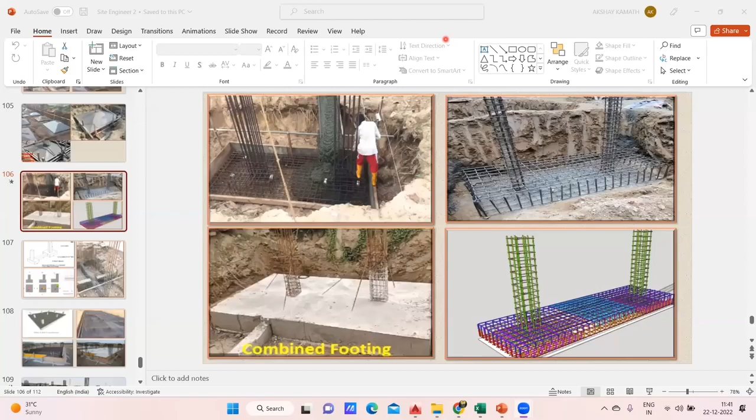So in this lecture, we'll try to see how to take out the quantities for the combined footing. Okay, that is a BBS for a combined footing. Now, one thing you need to understand: in the isolated footing, we used to have a bottom mesh. That is, this is bottom mesh on the longer span and we have one on the shorter span. This was the isolated footing, isn't it?

But in case of combined footing, what will happen? Same thing. You will have a bar in the longer span. You'll have a bar in the shorter span also, but this is in the bottom reinforcement. In the same way, on the top also you'll be having a bar in the longer direction and you'll have a bar in the shorter direction. So that's the only change you'll get in the combined footing, which you can appreciate here also.

If I try to drag this particular image, just observe here what has happened. You can see the bar is in the bottom also, longer span and shorter span. And similarly, on the top also we are providing reinforcement. Very simple. So for this, I'll teach you how the BBS has to be done. Already I have prepared and kept it. First, I'll explain to you, then we can try to prepare the same Excel sheet.

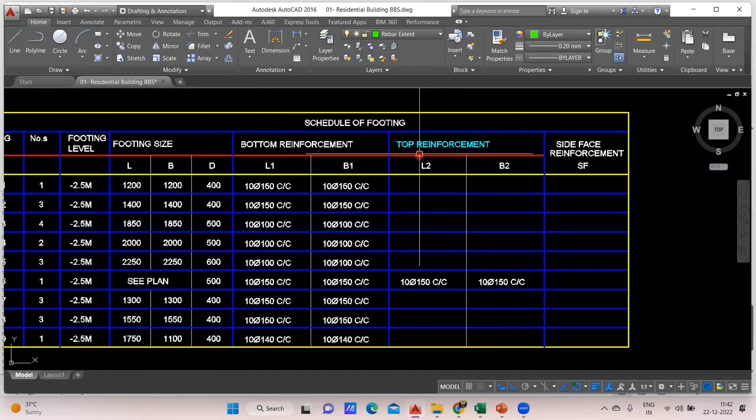So in our drawing, we had a footing, that is F6, which was a see plan they had written. See plan means it's a combined footing. They did not mention it here. And also remember, whenever you check the drawing, no one will mention to you isolated footing, combined footing and all. The moment you see any footing has a top reinforcement, most of the time it will be your combined footing. Like this is bottom reinforcement, whereas only for this footing, that is F6 footing, they have given the top reinforcement. So usually the meaning is that it is a combined footing.

Now another case is that it's not that all the time whenever you have a top reinforcement, it will be a combined footing. No, that is not the case. There is every chance even an isolated footing will have a bottom and a top reinforcement. So remember my words, there's every chance you have an isolated footing, but you will get the reinforcement in the bottom and also on the top. Usually this happens in case of industrial structures, where I had given you the assignment for the plinth beam. Those are industrial structures.

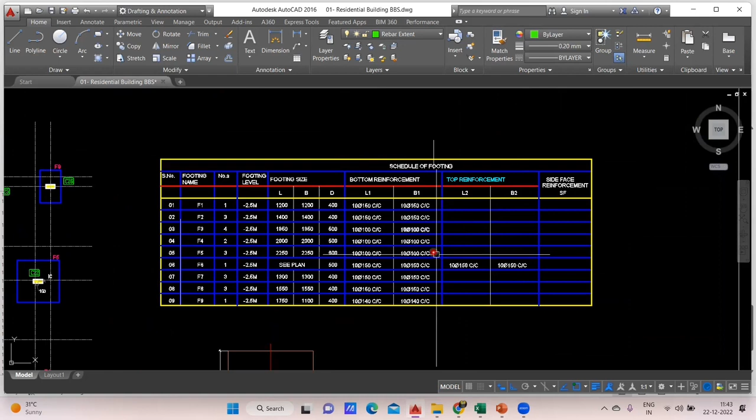There, even though it is an isolated footing, you get the reinforcement in the bottom and also in the top. The reason is that the load coming on the footing is more, and it is subjected to wind pressure and all. Because of that, we try to provide top reinforcement also. But don't be under the impression that wherever the top reinforcement comes, only that is combined footing. No, that is not the case. Okay, fine, this much is understood.

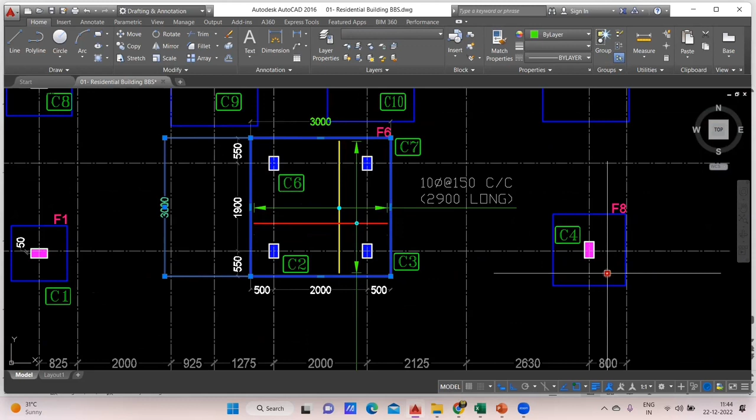Now we'll go forward. So in this, we have written F6 footing, and just see the size of the footing. I see the size is not given here. In that case, you have to come to the AutoCAD. This is my F6 footing, and I've taken a dimension. Outer to outer it is 3000 mm, and from here to here also it is 3000. That means the size is 3000 by 3000. So that is the same thing I've written: size is 3000 by 3000.

Coming to the depth of the footing. The depth won't be shown here. You have to come here in the C plan. What is the depth? F6 footing, it is 500. So I'll input 500 here. I've written 500. Where is that? I think I didn't upload. So this should be 500. Write 500. Done.

Great. So the same thing I've done here. Length is 3000, breadth is 3000, and depth is 500. So first we'll start with the bottom bar. Here I didn't write bottom bar, top bar, because it is understood it is an isolated footing. Only the bottom reinforcement will come. But here I'm writing, first I'll do the bottom bar, then I'll go with the top bar.

And you see the shape of the top bar, it is something like this. Bottom bar, it is like this. Okay, I'll teach you all these things, how it has to be done. Now coming to the bottom bar, again, same shape you have to draw. Nothing is changed. The method remains the same. You'll write here F6 bar along the shorter span, F6 bar along the longer span.

How many footings are there? This combined footing of F6, how many are there? So if you go back to the drawing, it is written only one. So only one number. Even in the plan, you can see this is only one number here. Only one footing we have. So I've written one here. Now come to the diameter of the bar. This also you need to input. Go back to the drawing. Come to the F6 footing. Observe this part, what it says.

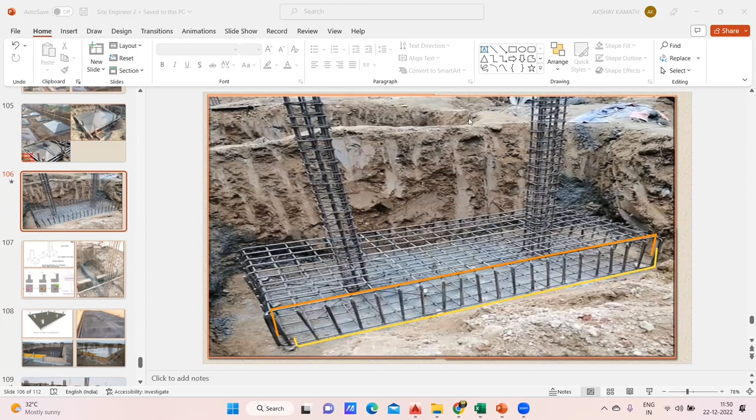In the bottom, when I'm giving a shape, my shape will be like this. This will go to the top. And when I'm giving it at the top, my shape will be this way. Right? Agree with me? Practically you can see the same thing also. That is the only change you're supposed to do. So that is why in the Excel sheet I've written top bar now. How do you do this? Again, you know how to do this.

It's pretty simple. What I've done is I just copied the same thing from here. I did Control C and I pasted it here, and told it is F6 footing, and made all those changes. Then I inserted 2 rows here. Keep your mouse here and press Control and plus. The moment you do Control and plus, two rows will be inserted, and you can merge it this way. Select, say merge and center.

Now you write here bottom reinforcement. See, all these things you should do. Bottom reinforcement. Done. If you want to change the color to differentiate, I'll give a blue color. So bottom reinforcement is done.

Now for the top reinforcement, what do you do? You just select this, in this way. Come here, give a white color. Now this much area you can utilize. Now again, you can make use of this border option. Draw border. Now you draw the border like this. See, one.

Come here. Draw border. 2 and 3. So this is the top reinforcement shorter span, and then leave 2, 3 spaces and come here. This is your other one. Done. You got the shape. Else you can make use of the insert button, illustrations, shapes, the normal method I taught, and that also you can do. It's totally up to you. Instead of the shape method, follow this border method. It's easy actually. Done.

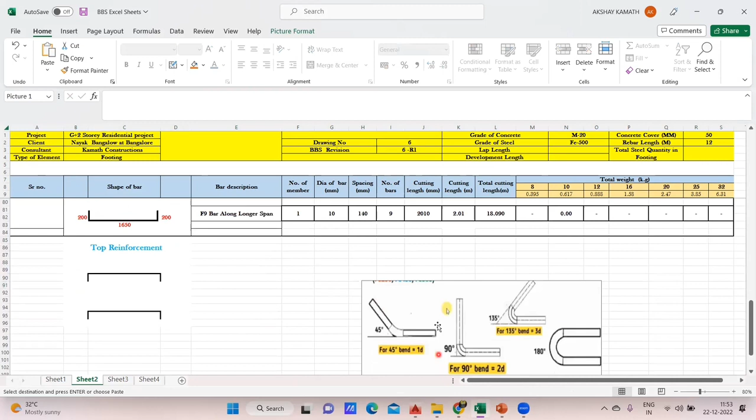Done. Next, you're supposed to just copy whatever you have written from here. Say Control C and bring it somewhere here, to the center. Else you can do one more thing. You can arrange this properly. Just merge these two cells, so these two will be one, so that this will come in the same line. You're getting my point? Because it should look good. That is why I'm doing all these things. Otherwise, it's not actually required.

Because if tomorrow somebody asks you for the Excel sheet, it should be in a readable format. Even he should find it good while reading. Done. So these ones are done. You can erase. If an extra comes, you say no border, it will go. And then you select and then say thick border. Okay, done. This is also not required. Come here, or even you can say erase border, and now you can erase it in this way. Okay, erase.

Now what you do? Now you copy this. Say Control C, bring it here and say Control V. Okay, it cannot be done. No problem. Then you write it. Then you say Control C, paste it here, Control V. Okay, and now you increase all these things. It will take some time. If you can copy, you can copy. Sometimes that will not happen, not an issue.

So what is the footing name? It is actually F6 footing, not F9. Okay, so write F6, write F6 footing. Okay, this also F6. Okay, done. Now come to the number of members. It is 1, no? I'll input 1 here. So first let me do that. Select, take it to the top, middle, increase the font of that, and then do this also, so that you don't have to change every time.

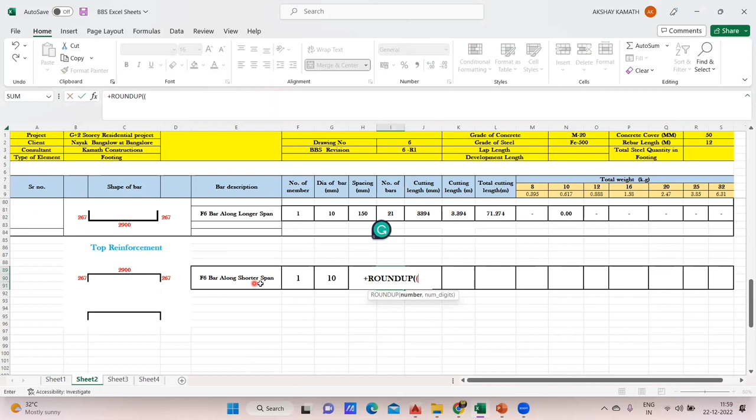Now number of bar. How do you find the number of bar? So for number of bar, again, we have to do round up. Okay. Open the bracket. Then 2 times you have to open the bracket. So we are finding along the shorter span. If you're finding along the shorter span, I need to take the longer span. So longer span is 3000 minus 50 on the left side, minus 50 on the right side. Close the bracket, divide by spacing. What is the spacing? 150.

Now it's not visible. I'll directly write 150. Okay. So this 150 when you write, again you have to write this. You have to open the bracket. Okay. And close the bracket. Finish. Then you write plus 1, comma 0, bracket close 2 times and enter. Okay, again that error is coming. The error is again for the very same reason. 3 open brackets and this close bracket is not matching. Put, yeah, now it should.

Because why this error came? No, I gave 2 open brackets this time. So what happened? 1, 2 and 3 open brackets are there, but closing bracket you see 1, 2, 4 brackets. So again it didn't match. That is why I got this error. So in that case, what you do? You deduct one thing. Okay. That's it. Now it will be all right. See, 21 number of bar I got. Here also I got 21. Correct, no? Fine.

Now find the cutting length. So cutting length, you know, plus what you do? 2900 plus exactly 267 plus 267. Then what you do? Minus, open the bracket, 4 into D. 4 multiply by D. D is how much? 10 diameter bar. Close the bracket. How much you're getting? 3394, 3394. Again, this answer is cutting length in meter. So what you do? This answer you divide it by 1000. So you can put bracket and you can do that also. It will be correct. Okay.

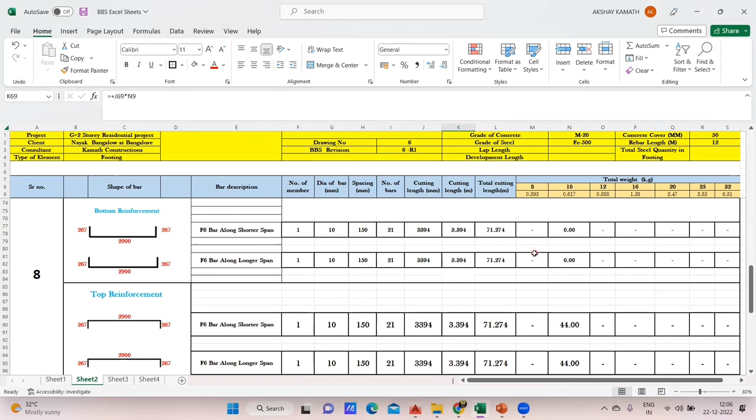Okay, so try to prepare the Excel sheet. It's very simple preparing the Excel sheet. And once you interlink, just try to verify your answers. Because why I'm telling is in this drawing it was easy for our calculation because everywhere it is 10 at 150.

Now in some other drawing, you may get where your bottom reinforcement is 10 at 150, 10 at 150, and top is, let us say, 10 at 200. So in that case, we write 200 here, 200 here. Accordingly, your answer should change. So did it change? It didn't change, because we had not interlinked. So in that case, this 150 will become 200, and this will also become 200.

Okay, I'll tell you how it has to be interlinked. I'll interlink because last time I didn't get the chance because it was not showing. Now we'll interlink this. Okay, see. Yeah, correct. And now here also I'll interlink. Okay, so when I interlink, this will change automatically. See, your answer also got changed.

Now let us say instead of 200, your spacing was 250. Now you see everything will change. 13, this also is 250. Finish, got it? So that is why you have to interlink.

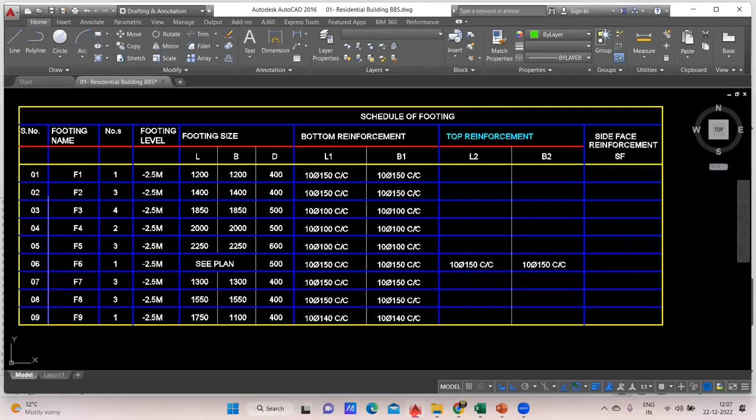Now let us say in AutoCAD, instead of 10 diameter, it is 12 diameter. I'll change everything here. Let us say you are working on a project where you got this as 12. Instead of 10, it is 12. And this spacing, I'll go with 225. And here also it is 12 only.

Usually these changes will not happen. The structural consultant will not make so many changes. But still for our calculation I'm doing it. And I'll say this we are going to place at 250. Usually that doesn't happen. As far as possible, the structural consultant will try to give 150, 150. Top also will keep 150 only.

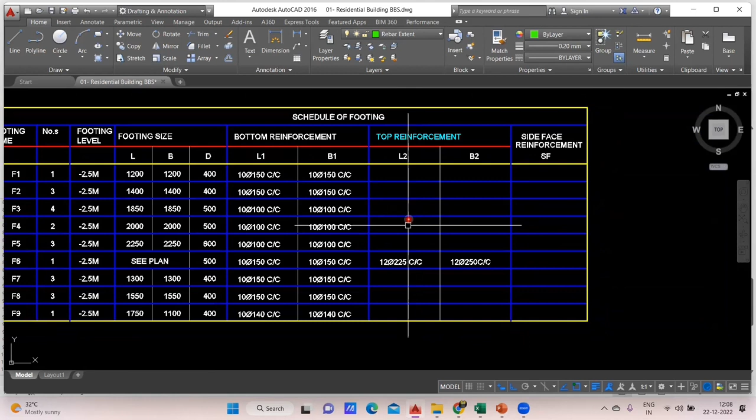Even though 225 is a requirement, we go with the same so that from the execution point of view it will not be a problem. That is why in most structural drawings it will remain same, but in few places due to some condition we change. Okay, so L2 is longer and B2 is shorter span. Shorter it is 250, longer it is 225. So shorter you make it as 225, and longer it is how much?

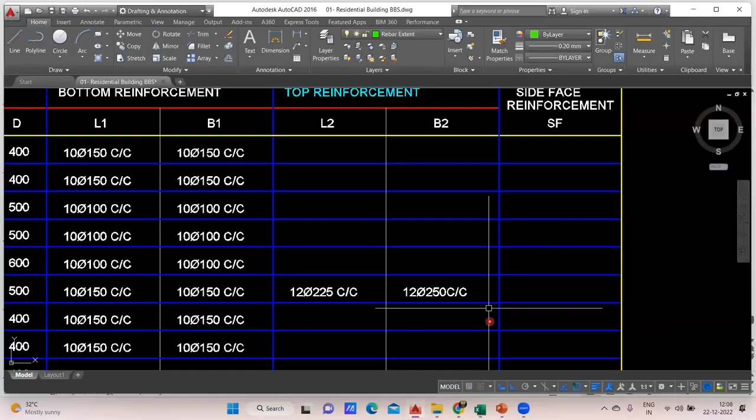Okay, shorter it is 250, no, B2 it is 250, and this is 225. Okay, how did I identify? I've written shorter here, so this is shorter. B2 means shorter span, and L2 is longer span, 225. So for longer I've written 225.

And diameter, what I've done, both are 12, 12. So what we'll do, here also 12, and here also 12. Done. Now you see everything got changed, isn't it? That is why you have to interlink in the Excel sheet. Everything will change. Simple. So if you get a problem something like this, it will change.

In the same way, I'll change the dimensions also. I'll not change it now, I'll show here only. Instead of this 3000 by 3000, let us say you have a footing which is 4500, and this is 2500. So automatically everything will change here. You see, everything got changed, isn't it? That is why you have to interlink everything so that it is easy for you to do the calculation.

Great. So I hope you have enjoyed my lecture up to here, and I've explained everything regarding the combined footing, how the BBS has to be done. I've given you different case studies also, how it should be done.

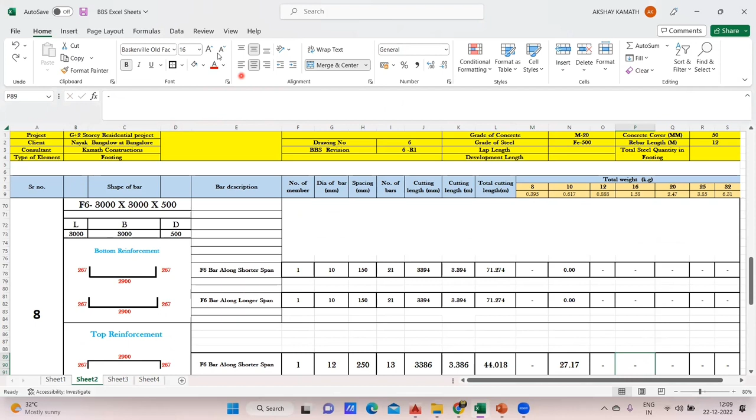So I hope up to here you have finished your Excel sheets and understood everything. The combined footing is covered, the isolated footing is covered, and for this entire drawing, all the BBS we have done. Once that is done, the final thing we are supposed to do is the total quantity required. For each footing we found that this much steel is required, 10.90, 11.16. But when you give the final details, it should be something like this.

At a single glance, you should come to a conclusion like how much 8 mm bar is required, how much 10 mm is required, 12, 16, 20, 25, and 32. And out of that, what is the total steel required? So for that, I've prepared a kind of row here. In this way we can identify. I'll teach you how it has to be done. It's very simple.

Since we did up to there, I'll do it here. Just select up to this much and say merge and center. Then in this part you have to write all these things. Whatever you have written, copy the same thing, like 8, 10, 12, 16, 20, 25, 32, Control C, and paste it here. It should come in the same line.

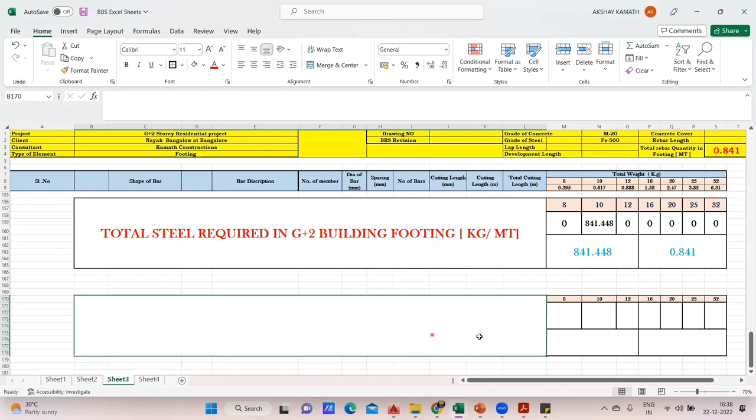Now select this entire thing and keep it in this way. If you want, increase the size. Great. Now we'll write total steel required for which one? It's a G+2 building, or you can write residential building, footing. When you write the final thing, it should always be in metric ton, but I'm writing both kg and metric ton. MT is metric ton.

So this is how it is. Once it is written, bring it to the center, and then increase the size. If you want to change the color, change the color. And write total steel. Fine.

Total steel. Got it? Done. Now 8, 10, 12, you just have to come and check here. In this particular footing, luckily all the diameters we used are 10 and 10, 10 and 10. Everywhere it is 10, right? So everywhere it is a 10 diameter bar we used. That means the weight also has come in the 10 diameter column.

All right. So you come here. 8 you can make it 0. 12 also it is 0. Since there is no steel in that, everything you make 0 except the 10 diameter. Now for the 10 diameter, we'll type plus sum, open the bracket, and then go on selecting from here. This is 10, no? So drag it this way so that all the values under the 10 diameter bar are selected, up to here. Then close the bracket and hit the enter button.

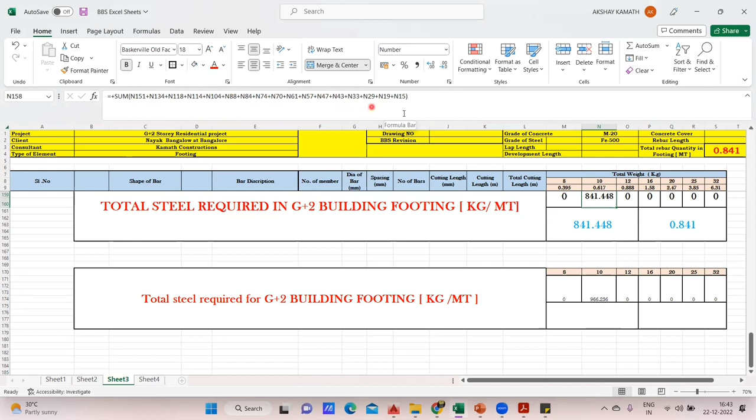And here it is coming 841. So we'll count: 1 to 17 here. And here 1 to 20. This is correct. And here it's 1 to 17. That means 3 are missing here, right? No problem, we'll verify that. Because, again, I told you, whenever you miss anything, you should know how to verify it.

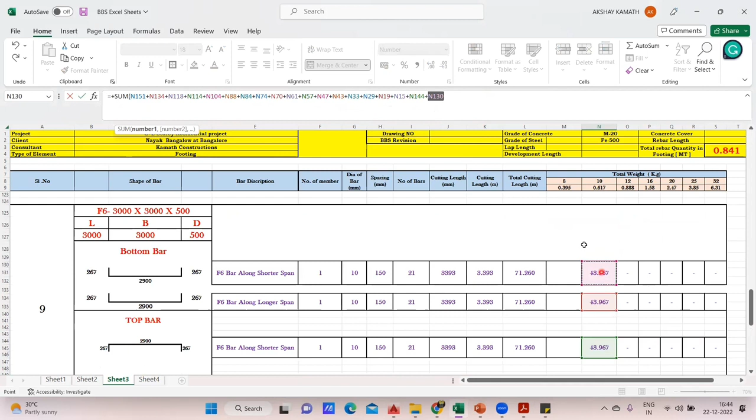I think this is missing. We have not considered this particular one. N144, you see, N144 is missing. Plus, again, go to the top. See, even this is missing, N130. So 2 we added, and I think one more is missing. See, this is also missing. Now it is okay. Close the bracket. N100 was not added. Now hit the enter button. See, now it's correct, 966.236. We were successful in identifying the error. This is how we are supposed to identify the error. Great, done.

Other than that, for 12, 16, 20 no steel is coming. In case it was a 12 diameter bar, we would have written it under the 12 diameter bar. I'll show you that later. Once that is done, next you have to add it. Here we'll write everything in kg. That is this plus this plus this plus this plus this plus this.

Okay, so again, it is 966 only. So this is the total steel that is required everywhere, including all the steel. Here it is showing only 10 diameter steel, how much it is required. Here it is showing the entire steel that is required. And here what we'll do, this answer we'll divide by 1000 so that your answer will come in metric ton. So 0.966. So this is the actual steel that is required in metric ton.

Usually when you order the steel, you order in metric ton. You don't order in kg. Okay. So you should say this much metric ton of steel is required. So that is why I've written metric ton. MT is metric ton. Normally speaking, when I say metric ton, you don't understand the quantity. But when I say in kg, you get an idea. Okay, 966 kg. Okay, done.

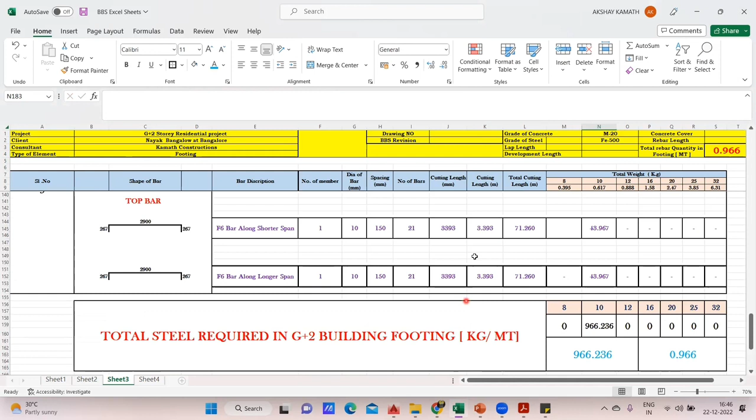Now let us consider, I'm giving some random values. I'm getting a 12 diameter bar. Let us say, okay, this is the final answer. You also should get the final answer, something like this. Even if it is very close to 950 also, it's okay, doesn't matter. So try to do your Excel sheets and you should get 966.236. Even if you get 975, even if you get 960 also, it's okay. You don't have to get exactly the same. If your values lie in between 950 to 1000 also, it's okay, not an issue. You don't have to worry. Maybe somewhere you might have made a mistake and it's totally okay. Because again, we add 5% wastage to this.

Okay, chalo. Now let us consider in this footing, somewhere we had a 12 diameter bar where 230 kg steel had come, and 8 and 20 diameter we had got some 450 kg steel. Finish. See, automatically the Excel got updated, isn't it? So 966 plus 230 plus 450 will give me 1646, and 1646 divided by 1000 is 1.646 ton, and automatically you see 1.646 has come here. So that is how the interlinking should be done, so that you can do everything in a better way. Okay, fine. Okay, that's it. Now again, this is the final thing what we have got.

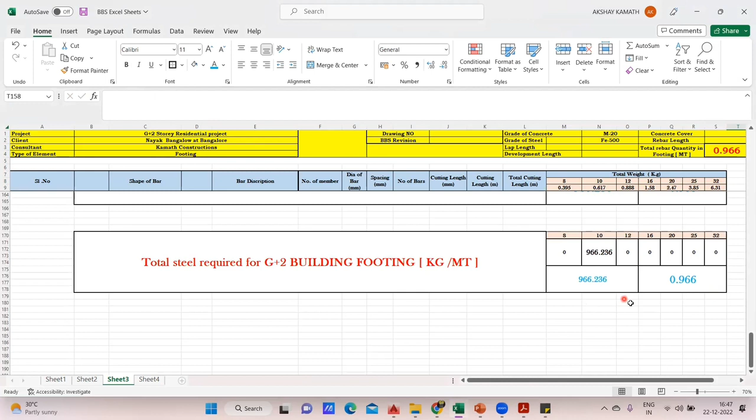Usually when we do this estimation sheet in this way, we usually add a 5% wastage to this. Even though you're getting 966, you can add 5% wastage to that. Either you can make a separate row here and say 5% wastage, or here itself you can add it. If you want, I'll do it here only. I'll add one more, and this is for the wastage. So when I say wastage, you say 5%, so 1.05. Why 1.05? Because 5% is 1.05. If I multiply by this, this is my wastage.

Including the wastage, this much steel you need to order, because whenever you order the steel, it's not that the same quantity will go in the execution. 5% may go in wastage. That is why we try to prepare the reconciliation sheets later. Anyhow, so this is one way of doing. If you don't want to do it that way, write 0.05 multiply by this plus. Okay, you follow this, 1.05, and 0.05 is 5%.

If you don't want to do it in that way, there is one more method. That's simple. You write this 966 plus open bracket 0.05 multiply by this value again and close the bracket. Same answer you should get. See, 1014 only you got. You can follow both. This is easy. 1.05 into this answer will give you 5%. This value is after the 5% of wastage. That's a common practice. We add 5% wastage to the steel what we have got.

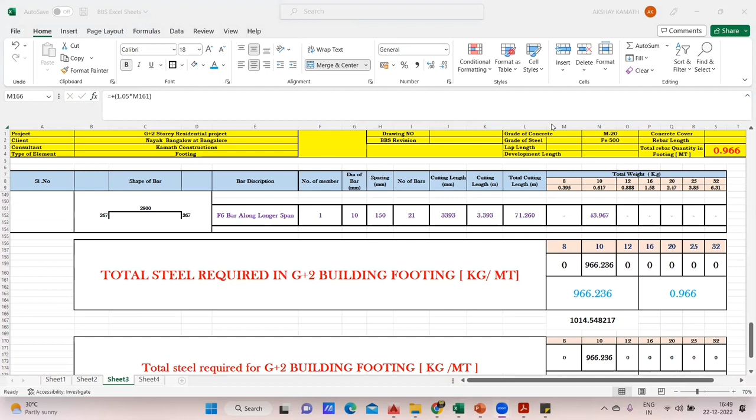So in this lecture, let me clear a few of your doubts. Whatever I taught you so far in the footing BBS, you may have a few doubts, like when we should consider the bend deduction and when we should not consider the bend deduction. Then in a few of the cases, I told you that for the depth you have to take 2/3 of the depth, right? Here, if you remember, we have taken 2/3. In some of the cases, I told you if it is not required, not to take it. Now, when do you use such cases? I'll give you complete information here.

See, whatever I told you right now, everything depends on the type of project that you're working on. That's the first thing. Second thing, it depends on the client and, let us say, the contractor. So again, it depends on which company you are working for and what they follow. These are the three things it depends on.

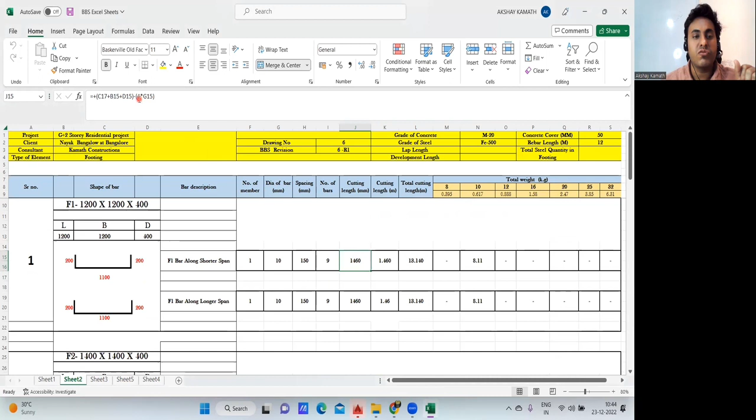If that is the case, come to the Excel sheet. Bend deduction, anyhow, I applied it. Here you can see the bend deduction minus 4 times I have applied it. This depth, they are telling you to take the complete depth. That means instead of multiplying by 2/3 the overall depth minus top cover minus bottom cover, which is a general construction practice, you take the complete height minus the top cover minus the bottom cover. Then you just remove this 2/3 from there. Automatically your answer will be 300, 300, and this also has changed.

In the Excel sheet, initially the weight of the steel was 8.11 and the cutting length was 13.14. The moment I remove that, it came to 9.22 and 14.940. This is case number 1. If your company is following this, or if your manager has told you this is what we follow in the company, then you follow this. No harm in that.

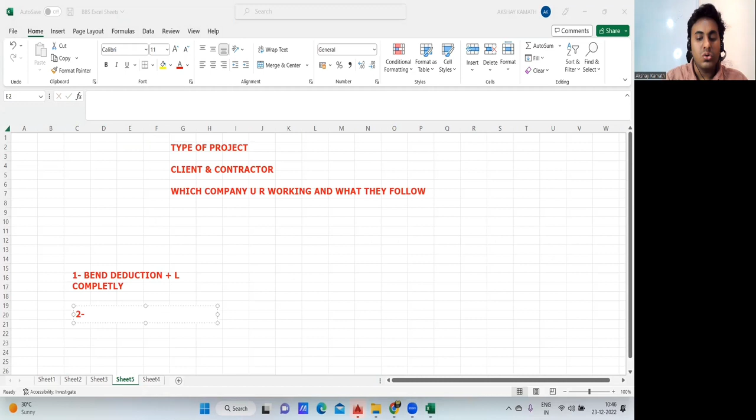Now we'll go to case number 2. Let us say in your company they told you no need of bend deduction. You don't have to apply the bend deduction, and whatever L you're taking, you can take 2/3 of the L. 2/3 means 67%. I'll write it as 2/3 L. This is another company where you are working, or that particular company is following this method for the bar bending schedule. No problem, you follow the same thing.

What are we supposed to do? We are supposed to not apply the bend deduction, and we can take the depth up to 2/3. So in that case, simple, wherever you have applied the bend deduction, that is -4 into, you delete this part. Bend deduction is not required. So criteria number 1 is satisfied. Second, you apply 2/3 of the depth.

So 2/3. Okay, 2/3 if you do, it will be 200. Accordingly, you see your cutting length will be this time 13.5 and 8.33, 8.33. Previously it was something 9, so hardly there is any difference now. So we have taken two cases. One case where the bend deduction has to be applied, and also you don't have to take complete 2/3. Here, no bend deduction, but you have to take 2/3.

In this way, there may be another company which says that, like we did previously, you don't have to apply bend deduction, and you don't have to take that complete 2/3 depth. Accordingly, you can work out, based on what the companies follow. I have seen people taking it, but in most construction practice, what they do is apply 2/3, because of this L. For example, let us say this is my footing. I'll explain you here.

Let us say this is my footing, and whatever L you are putting, this will come in this way. I'll go with only bottom reinforcement, no need of top. This is bottom. Only up to this much length it is enough, because that itself is your development length. If this is your column, your development length starts from the outer face of the column. From here your development length starts. That is the concept we apply.

Now let us say the depth of the footing is 600 mm. So if I want to find this L, what would be the formula? The usual formula we apply: overall depth minus 50 mm cover from the top, and minus 50 mm from the bottom. So it will be 500 mm. That means this particular L will be 500.

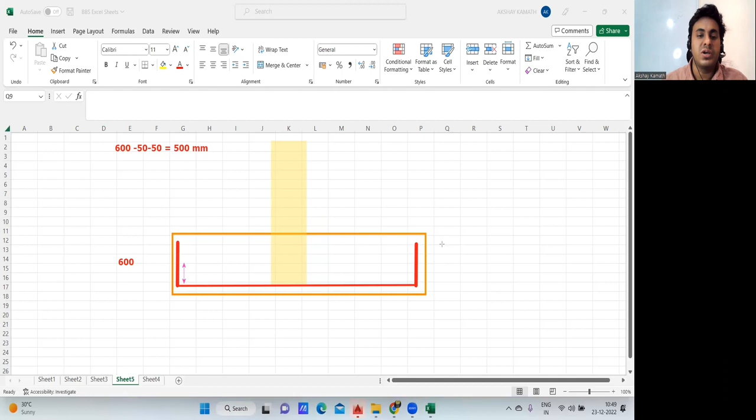So 500 means roughly it will come up to somewhere here. Practically it's not required. If the depth is 600, 500 will come somewhere here. Practically that much length is not required, because actually it's a wastage of steel also. That is why a few clients say you take 2/3 of the depth. Whatever answer you are getting here, you take 2/3 of that. That is why I made you people take 2/3.

That means 500 is correct. For this you apply 2/3. Usually we say 2/3 is 67%. 67% only will give the L. So if I do this, how much will it be roughly? 500 into 0.67 is 335, or 500 into 2 divided by 3, it will be 333 mm. So practically what we do, we try to keep this 330.

If it is 330, then obviously this part will be coming up to here. So this will be 333 mm, you're getting my point? And this also will be 333 mm. So this is usually what we follow. But there are a few people who say, no problem, you don't have to take 2/3, you take it completely. In that case, you do according to that.

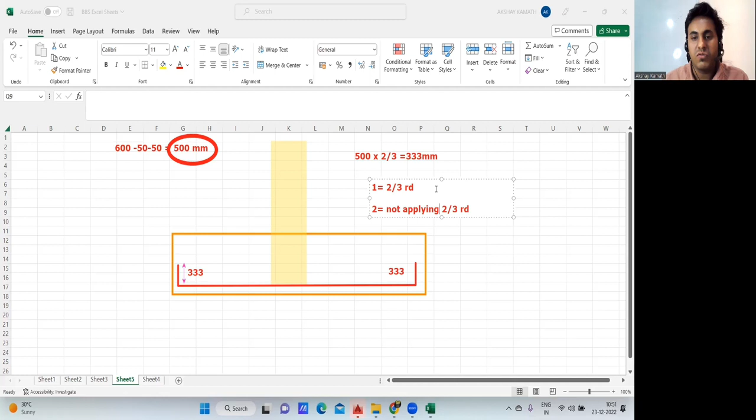Now the question is, let us say there are two people. Person one is applying this 2/3 rule. I'll write this as 2/3 rule. And there is another person who is not applying the 2/3 rule. Then who is correct? Because when you're applying the 2/3 rule, let us say your cutting length of the bar is coming 14 meter, I'm taking random. And when you're not applying, obviously the length will increase. It will come to 17 meter.

So obviously, if it is coming 14 meter, then considering the unit weight of steel and all, let us say I'm taking some random value, it will come to 100 rupees. Let us consider 100 rupees or $100. Let us consider $100. I'll write $100.

Okay, rough value I'm taking just to make you understand. Now here, since it is 17 meter, obviously the rate will increase. Let us say this is 150 rupees, or let us say this is $150, right? So there is variation in the price, then whom are you going to consider? So usually this thing has to be decided initially only. Before the start of the project, you have to decide whether you are taking it or not.

Okay. Now, everything is on the paper. I can do anything on the paper, in the Excel sheet. But when you do the real execution on the site, for example, let us say in the paper, in the Excel sheet, you have to take 2/3 of the depth. But on the site, if these people do it completely, then what you should do in the billing? This is just an estimate. When the actual work is over, for example, this work is over.

Let us say today you did 5 footings of similar sizes. Then you have to do the billing, how much cost has gone into that. When you do the billing, we'll see exactly what has happened on the site. That is how it is. So few contractors say that we'll take complete depth. Few people, in order to save money, say we'll take complete height. That means this L, we'll take overall depth minus top cover and minus bottom cover.

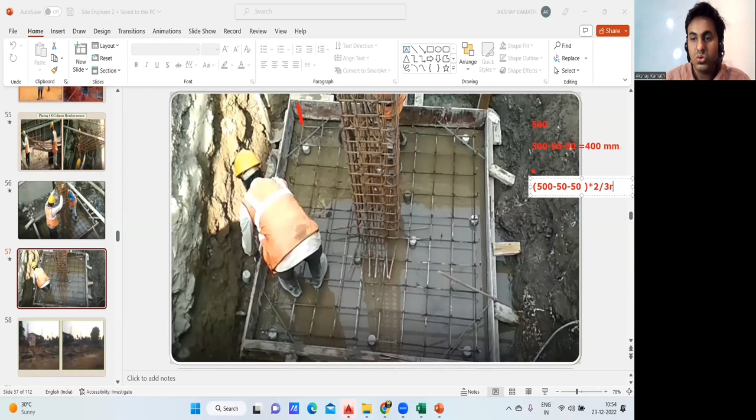What few people do instead is 500 minus 50 minus 50, and then they apply the 2/3 rule again. So how much does it come out to be? We found it to be 333 mm. So on paper they have shown that they'll take 400, but in real site execution they have taken only 333. That means roughly 67 mm of steel he has saved. This side 67, this side 67.

I'm just speaking of one rebar. Imagine how many bars will come, how many footings will come. In that case, they can save a lot of money. So that is why whenever you're doing billing, you have to go and check on site what the contractor has done. There are people who say we'll do according to this 400 only. But on the site, they have not given 400. They have taken 2/3 and given 333. Whatever amount he has saved is profit for him. Getting my point?

So BBS completely depends on the site conditions. Whatever you follow, follow the same thing on the site. If you're not following the 2/3, if you want to take the complete depth minus top and bottom cover, do that, and the same thing has to be executed on the site. You have to keep the L similar to that. Otherwise, take the 2/3 rule, and whatever answer you get should be the L on the site, because finally, whatever you do on the site will be paid to the contractor. All your doubts are solved. You can go with that.

If you're working in any company, ask your project manager or site manager what we're supposed to do. If the site manager says we are following the 2/3 rule, overall depth minus top cover, bottom cover, and 2/3, you follow that and make sure the same has gone into the billing. Usually the billing engineer will take care of that, but being a site engineer you have to make sure, because ultimately the billing engineer will ask you what has been done on the site. So that is why you have to understand all this concept. I have explained everything: the two-third rule, not applying it, and the same thing applies for the bend deduction also.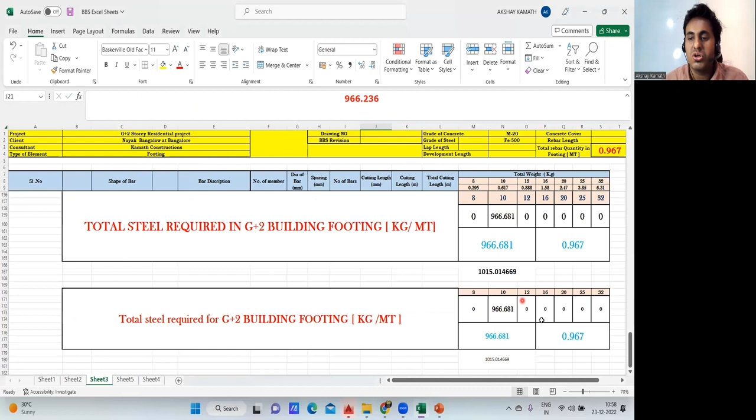And if I don't apply the bend deduction, what will happen? I'll take it out, and this also I'll take it out. So what has changed? Nothing much has changed. Initially it was 966.236. Now it has changed to 681. Hardly 0.4 has changed. That's it. Not a big change has happened. Even if you put a cost also, nothing will change here. Getting my point? So based on the requirement, you can do that.

Great. I did for one. You can prepare the same Excel sheet. You just copy the same Excel sheet, create a copy, and in that you don't do the bend deduction. In one you do the bend deduction. You can prepare two Excel sheets and you can compare the value. Just in case you want to see how much variation will happen, you can do that. Great. So that's it.

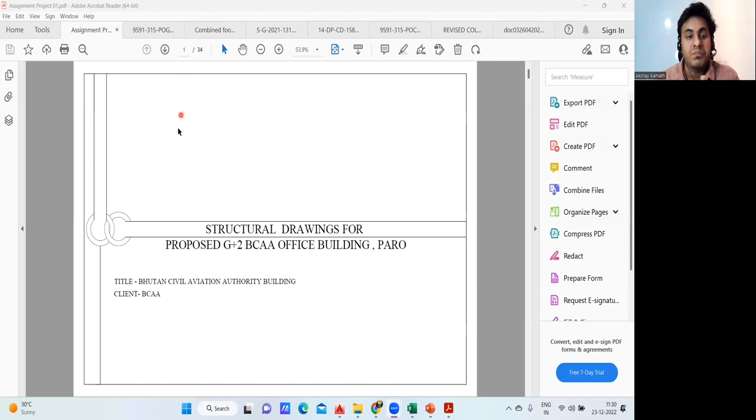So here I'll give you a lot of assignments, and also I'll be explaining a few of the complicated footings where you can take out the BBS. The method remains the same, but still, I take a lot of assignments so that you don't find any problems in future. So all these drawings I've already given you. I hope you have downloaded that. And if you remember, we had taken the quantity estimation for this footing as an assignment.

Now for the same footing, this time the reinforcement is given. What is written here? Raft bar in bottom, that is reinforcement bar in bottom, 12 diameter at 155 center to center spacing, and bar in top, that is both ways. Now here what has happened? See here, this is actually a kind of isolated footing. If you observe here, it's isolated footing only.

Why? Because there's one column and there's one footing, so it's isolated footing. But here, like I told you, all isolated footings will not have only the bottom reinforcement. There's every chance they may have top reinforcement. This situation usually comes in industrial structures, where you're putting an RCC substructure. Over that, a steel structure will come, like the steel column, the purlins, the rafters and all. Due to the wind load, there may be uplift.

Sometimes because of that reason, we give the top reinforcement also. If you don't give the top reinforcement, that column may punch the footing, and it may bulge in this portion. In order to take care of that, minimum reinforcement will be given in the top also. So if you observe here clearly, the bottom reinforcement is given, which we usually give in isolated footing, and then the distribution bar. But similarly on the top also we have given.

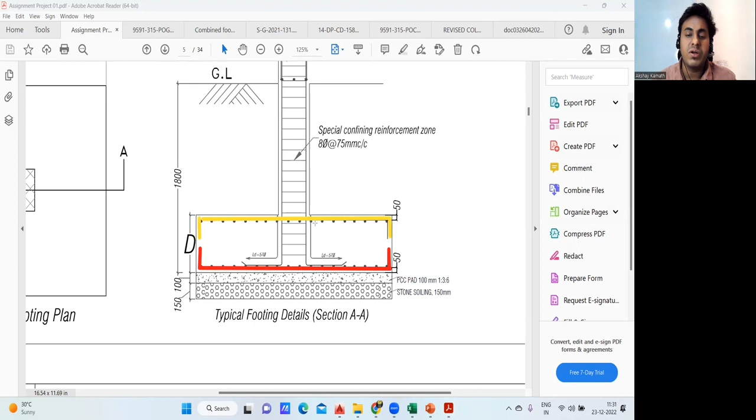This is actually like a case of a combined footing, but it is not combined footing because you have one footing and one column. But I explained the reason behind that. That is the reason you get a reinforcement here. It's written bottom, both ways. They don't give a column. All the drawings won't be like you think. Usually what is mentioned here, both ways, means shorter span and longer span.

This is for the bottom. Similarly, this is for the top. Both ways means top shorter and top longer. Both ways means bottom shorter and bottom longer. A few people, instead of writing it this way, would have made 4 columns: bottom shorter, bottom longer, then top shorter, top longer. But here this person has not given that.

Now you can do the BBS for this. Very simple. This BBS is similar to the Excel sheet I've taught you here, the combined footing one, same thing. This is how your BBS should look. Bottom shorter will come, bottom longer will come, then top shorter and top longer will come. Nothing will change. I'll just input these values and you'll get the answer. So let me do that quickly.

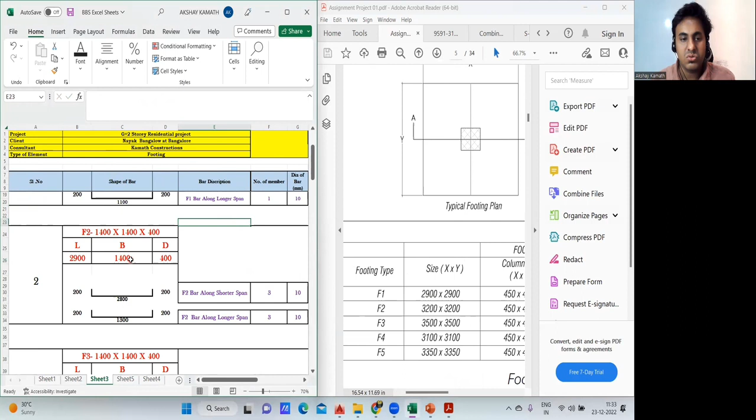First you have to mention the size of your footing. It is 2900 by 2900. I'll input here 2900. This is also 2900. Then what is the depth of your footing? The depth of the footing is 500. So input here 500. Accordingly, you see, you got this reinforcement.

Where did I put it? Wait, it has gone to the top. It should come here, not there. This is that footing. How much is it? 2900 and 2900, and depth is 500. This is done. So you got the answer here.

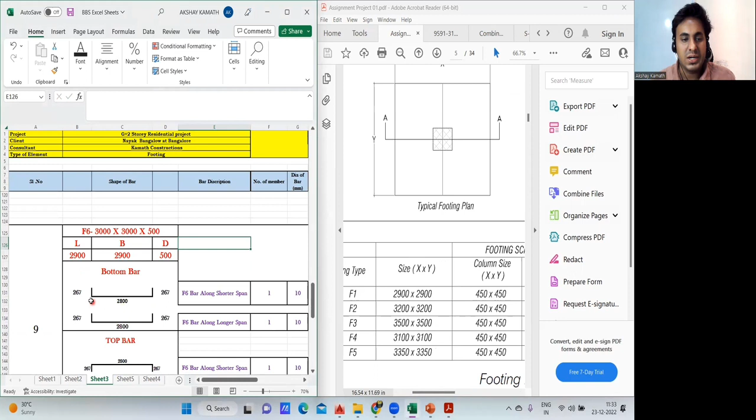Your cutting length is 2900 minus 50 on the left side and 50 on the right side, so minus 100. 2900 minus 100 is 2800. By default, you got the answer. And for the depth, we know it's 500 minus top cover minus bottom cover, as I have done. You got it as 267. Now come to the reinforcement part.

The reinforcement says you're supposed to use 12 diameter bar. How many F1 footings are there? The number is not mentioned, so for our understanding I'll take only 1 for the time being. The reinforcement is 12 diameter, so input 12 here, 12 here, 12 here. And the spacing is 155. Earlier I had put 150; make it 155, and here also 155.

Where did I do it? Along the bottom. I want the top also. This is top reinforcement. Similarly, come here and change the top also. Once you change here, automatically this part also will change. Only you have to change this part now. This is 12 diameter, this is also 12. You know the reason. And what is the spacing in the top reinforcement?

See, it's written top both ways, shorter and longer. It is 175. So I'm making 175 here and 175 here. Done. Accordingly, you don't have to do anything. You got the answer. Total 20 bars are required here, and in the top you require 18 and 18. Why does this become 17 then? This is 18. Okay, round up.

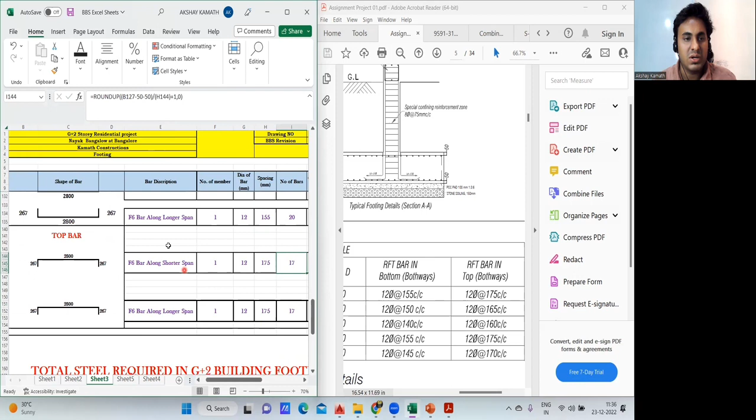Okay. Anyhow, let me make it clear. I have taken the shorter span. If I'm taking the shorter, I have to take the longer one. Longer I have taken, correct. And if I'm taking the longer, I have to take the shorter. So shorter will be, yeah, shorter will be C. Yeah, so correct. B and this is C. So, okay, fine, good. Done. Finish. Your answer is ready.

Only the thing is, what change are you supposed to do? This answer will come in 10 diameter, which is actually wrong because we're making use of 12 diameter. So in that case, you strike out the answer, you delete this, this, this and this. Why? Because it is 12 diameter, so your answer should come in 12 diameter. So you just come here, say plus, multiply this total cutting length with the weight of 12 diameter, which is 0.888, and hit the enter button.

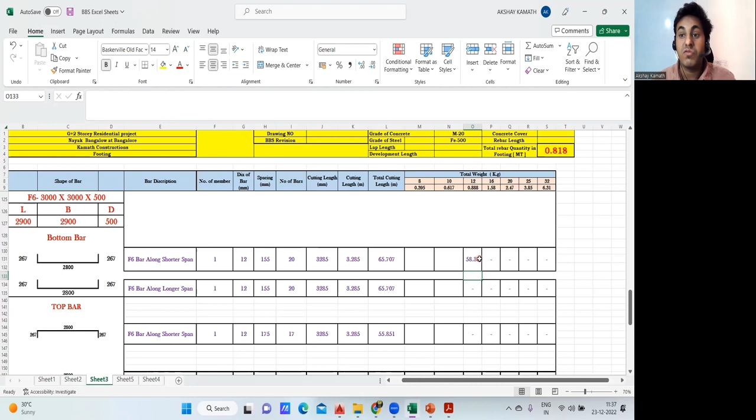Finish. So 58.35 kg of steel is required. Similarly here also you are supposed to do the same thing, 65, multiply this by 0.888. Okay, fine. Similarly here also, plus, click on this and multiply by, again it's a 12 diameter, so 0.888, enter. Similarly here also, this one multiply by this one, enter. Got it? So this is the right answer. If you want, do it manually and check the answer. You'll get the same answer.

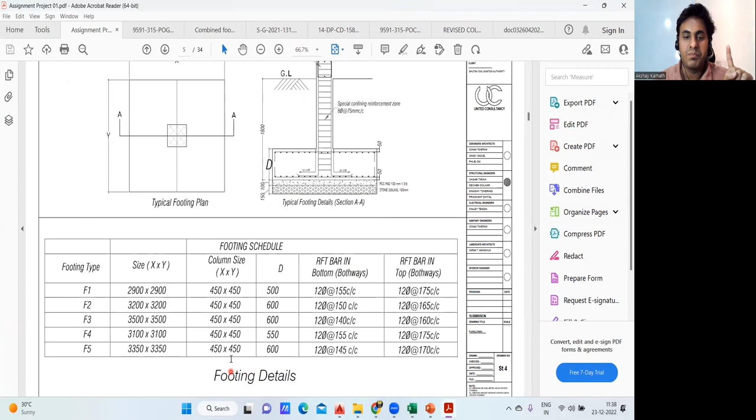So that is the easiness of doing an Excel sheet. If you prepare the Excel sheet in this way, you can take out all the quantities. So one I've explained. Similarly, the rest you try to do on your own, because now you are in such a position where you can do all these things. I always tell, if you're working for the first time, do it manually. Then do it on the Excel sheet and try to verify the answers. Only then you'll have confidence in that. Now try to do the other things on your own. Okay. One assignment is done.

I'll go to one more assignment now. So one more assignment is this one. I won't be sharing this drawing since these drawings are not to be shared. They're confidential drawings. Only whichever is shareable, I'm going to share. Don't ask for all these drawings. Only thing is, if you are interested, just take a screenshot of this.

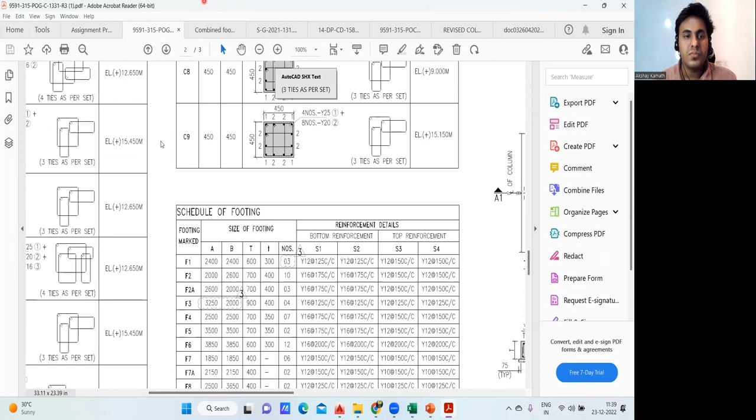See, this is a cross section that is given. Now if you observe here, see where it is mentioned. So S1 is S1 and this is S2 they have written, and this is S3 and this is S4. Okay, so how do you understand this? It's a cross section they have given. So you can consider S1 to be your distribution bar and S2 to be your main bar.

Similarly on the top, this S4 is your distribution bar and S3 is your main bar. Okay, sorry, S4 is your main bar, because in the bottom, shorter span, then longer will come. Again in top, shorter span, and inside that will be the distribution bar. The main reinforcement will be at the top, whereas in the bottom, the main reinforcement will be in the bottom.

After the top, next to the top, this is the top main bar. This will be below that, but in bottom this will be main. Over that the distribution will come, and in the top this will be main. Below that the distribution will come. So in the top this will be my main reinforcement, and this will be my distribution. In bottom this will be my main reinforcement. The dotted is a distribution.

Okay, fine. And for that they have given it here. If you don't understand from there, they have given it here also. You can go through this drawing. So this is typical. They have written this is S1. Where is S1? This is S1. This is S2, and this is why it is dotted. The dotted indicates it's a top reinforcement, and S4 is top. S1 is bottom. You're getting my point.

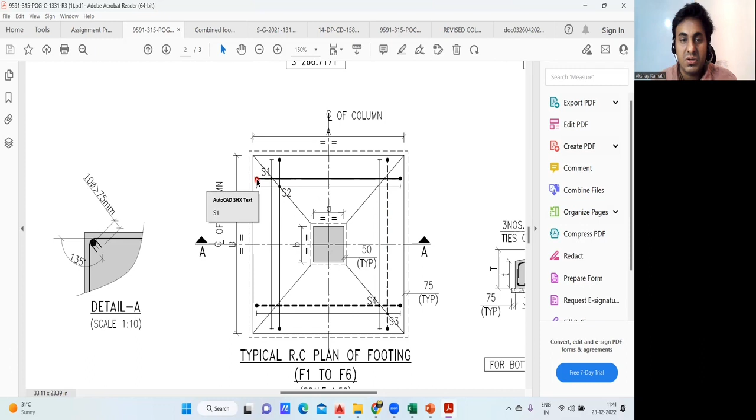Usually, whenever a drawing mentions dotted, it means it is the top reinforcement. They put it in dotted line. That is a typical way of doing structural detailing. So this is S1 and S2, and based on that you can check this. Come to the footing reinforcement. Anyhow, it doesn't matter to you. You just take out the quantities if you are interested.

So you take this as shorter span, this as longer span, and then in top, you take this as shorter, this as longer. Very simple. See, this is 125 125, it is 150 150, right? Again it is 175 175, this is 150 150, 175 175, 150 150, 125 125, 125 125. Got it? Take a screenshot of this and try to do the BBS for this. If you have any doubt, get back to me, I'll solve your doubt.

Again, even though this is an isolated footing, this CF means combined footing, even though it's isolated footing, you get a bottom reinforcement and top reinforcement, because it's an industrial structure. In industrial structures you get such kind of reinforcement. Okay, 2 assignments are done. Next we'll go to the third assignment. It's totally up to you whether you want to do it or not. If you are okay with the concepts, you don't have to. Again here also, the footing schedule is given.

Bottom rebar in L direction, that means along the length direction, and bottom rebar in B direction, along the breadth direction. That means this is your shorter span, this is your longer span. That is why we have prepared the Excel sheet that way, bottom and top, along shorter span, along longer span. Got it? Then the drawing is given to you. Based on that you can take out the quantities. Can you take out the quantities here?

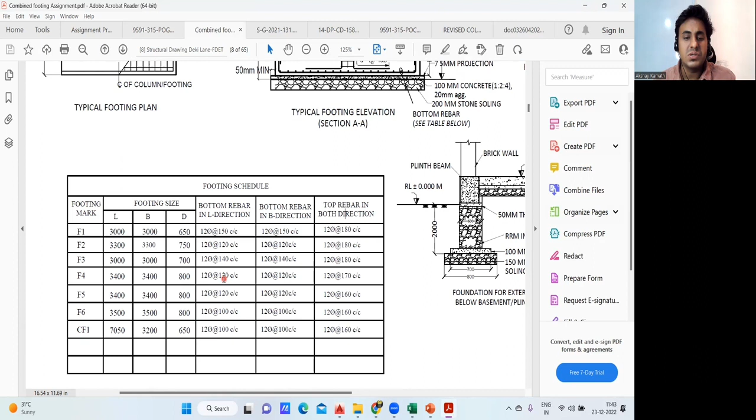Again here, same thing, bottom shorter and longer, and top also shorter and longer, but it is given in both directions. That means longer and shorter both are 12 dia at 180 180. So you can do the BBS for this particular footing also. Try to do 1 or 2 footings so that you get an idea. Next, in the same way, I'm taking a lot of drawings. Take a screenshot, because these drawings are already shared with you.

This drawing I cannot share. You can take a screenshot of this. Don't ask me for these drawings because I cannot share them. Even this I won't share, but you can take a screenshot, note it down, and do the calculation. If you want me to verify, send me the Excel sheet and I'll verify it. Bottom bar, top bar, again same thing. So bottom main, this is TRNS. What is TRNS?

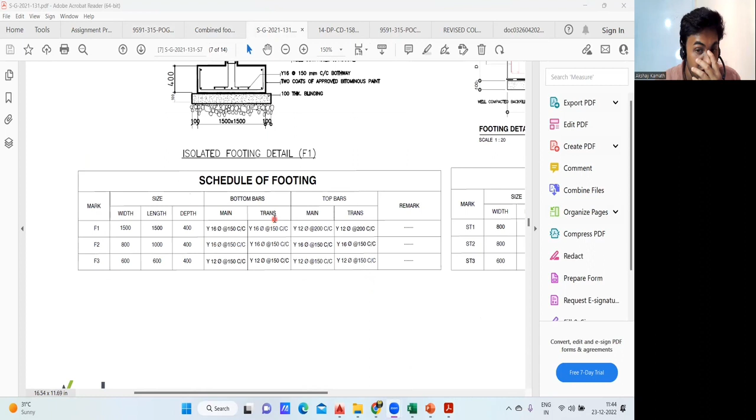Okay, I don't know what you mean by TRNS, but actually it's distribution steel, main bar and distribution. Okay, it's understood. You can do it for this also.

Then after that, I had taken one drawing where I explained this thing, which is the slope footing. If it's a slope footing, the same thing applies; the BBS won't change. Only the estimation will change, whereas the BBS remains the same for the slope footing also. So for the slope footing, they have mentioned it here. See, footing F1 and F2 is given. Forget about all these things. When you come to the BBS, this part is not required. We are only concerned with the steel.

So it's written here, B1 at CNC, B2 at CNC. That means this is along the shorter span, and this is along the longer span. In the shorter span, you're supposed to use 12 diameter at 150 center to center spacing. Along the longer span, you're also supposed to use 12 diameter at 150 center to center spacing. For F1 footing, how many numbers are there? 16. For F2, there are 8 numbers. You're supposed to use 16 diameter at 150 in the shorter span, and 16 diameter at 150 in the longer span. Pretty simple.

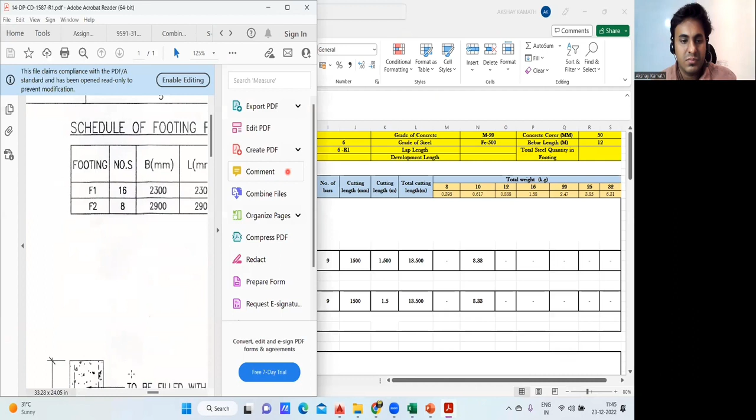If you want, I can do this for you. I'll go to the Excel sheet and take one footing. I'll take this particular footing. I'll do it here. Quickly tell me what is given there. So I can do it in this way. I want the size of the footing, which is 2300 by 2300. So let me input that: 2300, and this is also 2300. Okay, done. Next I want this thing.

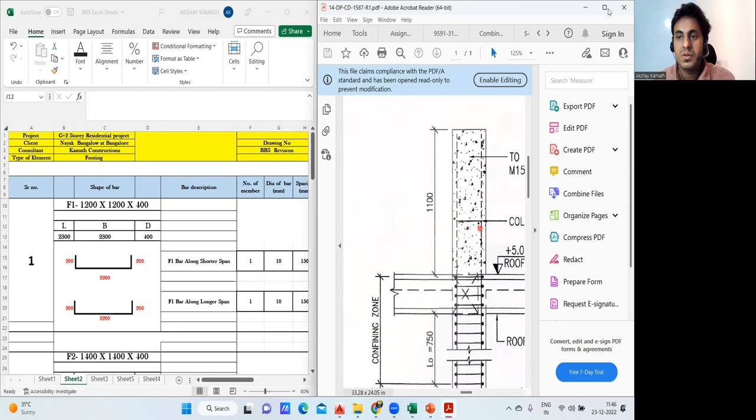What is the depth of the footing? Normally the depth of your footing will be your overall depth, but here it's not the overall depth. You're supposed to take this depth in case of this footing. You may have a doubt here. See, when you're doing the slope footing BBS, your D will be only up to this depth, because your L will go only up to here. So you have to consider D2, not D1. D1 is the overall depth, that is not required. Your L shape will be bent only up to here. So take the D2 dimension.

For the D2 dimension, we'll go back to that again and find it from here. D2 is 200 in both cases. So I'll take 200; the depth will be 200, and I'll change it according to that. We can round this up since it comes in decimal points: ROUNDUP, comma 0, close the bracket. The error is because of the bracket, so give one open bracket. Now it will be okay. 67, 67. Got it? When it comes in decimal, try to change it.

Now come to the number of bars. How many F1 footings are there? There are 16 F1 footings. So make 16 here and 16 here. Then the diameter: you're supposed to use 12 diameter at 150. This is along the shorter span, so first this one, 12, and spacing is 150. So the shorter span I've done, 12 at 150. Next I'm doing the longer span, which I haven't changed. In the longer span it is again mentioned 12 at 150, so here you change it to 12.

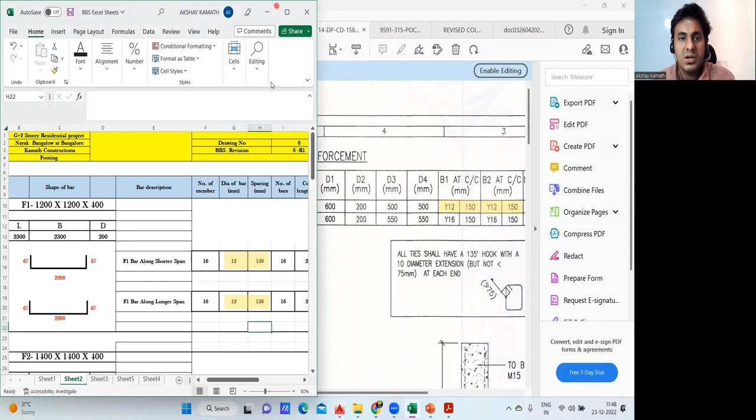Yeah. You make it 12 and this is 150. Got it? Done. Once you do all this update, finish. Your answer is ready. What is the answer? Simple. Your total cutting length will be 2200 plus 67 plus 67. Okay, I haven't done the bend deduction.

You know the concept now. Bend deduction, if you want, you apply it. Let me apply minus 4 into, which is that? This one, 12 I'm supposed to take. Okay, done. Here also, if you want to apply bend deduction, minus 4 into 12. Done. Okay, fine. And total cutting length will be how much?

2.286 is the cutting length of one bar, multiply by number of bars. Number of bars, 16 into 16 I have to do because there are 16 F1 footings. Got it? So totally it will be how much? Now one change should happen. Always remember, because I'm finding the weight of a 12 diameter bar, but my weight is coming in the 10 diameter column. So this I should delete.

So when you do this, this is one problem. You come in the 12 section, right? Plus this multiply by 12 value. Enter. Finish. Your answer is ready. Plus this one multiply by 12 value. Done. Finish. So this is the total steel that is required.

If you're putting an F1 footing of 1200 by 1200 by 400, having 16 numbers according to this particular drawing, then your BBS will be this much. When you give it to the bar bender, you have to tell him cut this 2200, make this 67, 67, and accordingly you try to do. And if you ask what should be my total cutting length, you should cut 2.286 of a bar.

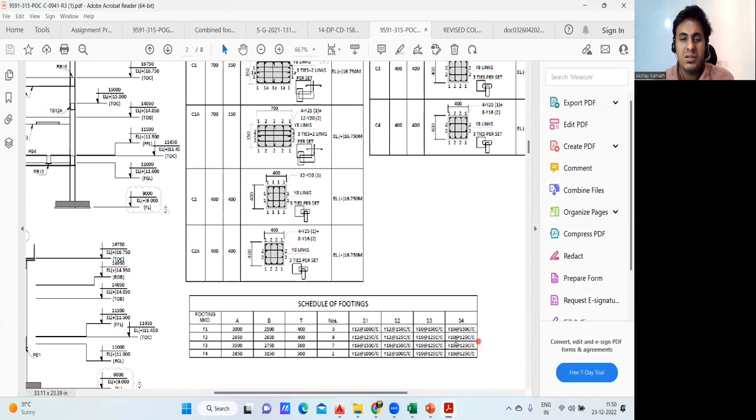Again it's the same thing. This is another drawing I won't share. This is another industrial building, and this is actually isolated footing, F1, F2, F3, F4. If it is combined, it will be CF1, CF2. It's isolated, but you're getting bottom reinforcement shorter span and longer, top reinforcement shorter and longer. If you want, you can do BBS for this also, so that you don't have any doubt.

Now let me go to a few of the industrial projects. This was one of the projects which I had explained to you at quantity estimation time, right? Now, see, this is BBS. We can do the BBS, very simple. Same thing, I'm showing you just for your understanding.

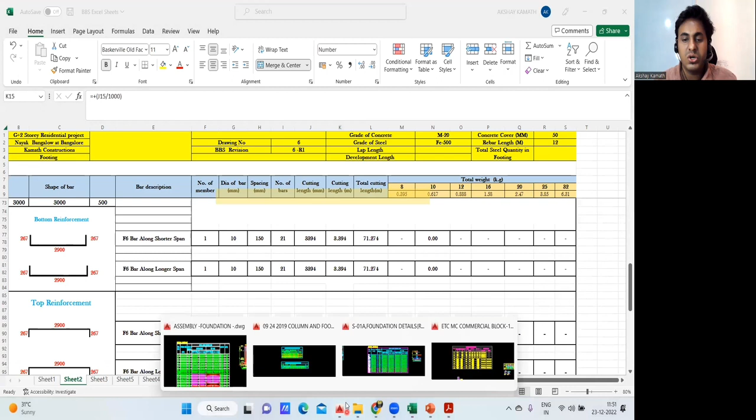This is another industrial project, because industrial projects are a little bit complicated. This is another very big commercial building. I won't share this drawing, because a few things I have shared already, so don't message me for the drawing. Whatever is required, I'm showing it here. You can take a screenshot of this and you can take out the quantity.

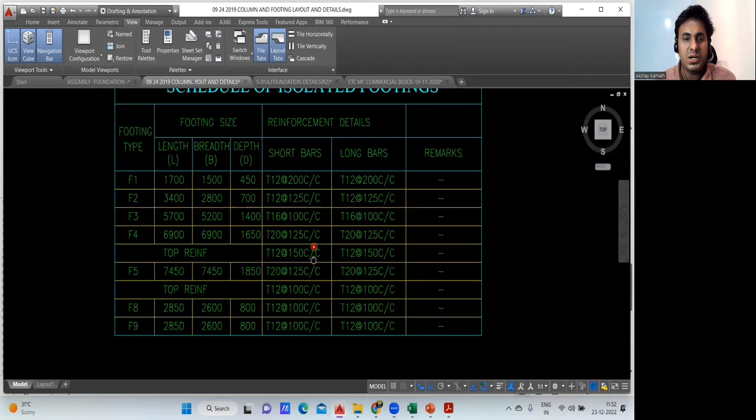Again, see here. F1, F2, F3, F4, this is your isolated footing. F5 is also isolated footing. F8, F9 is also isolated footing. And here, F1 up to F3 footing is isolated footing where you have reinforcement in the shorter span, that is bottom reinforcement, and long reinforcement. There is no top reinforcement here. F1, F2, F3 same. Similarly, your F8 and F9.

F8 and F9, this is also isolated footing where you have a shorter reinforcement in the bottom 12 at 100 and 12 at 100 in the longer span. These things you can do.

Whereas this F4 footing and your F5 footing, this is also isolated footing, but these people have bottom and top reinforcement. Now you see how these people have mentioned it here. F4, they have given reinforcement 20 dia at 125 center to center spacing. This is bottom in the shorter span, 20 at 125 center to center bottom in the longer span.

Now he has mentioned top reinforcement. So in the top, you are supposed to provide another 12 dia at 150 in the top along the shorter span, and 12 at 150 in the longer span. You can do that, no? Very simple. You have an Excel sheet ready, or you do it manually, you get the answer.

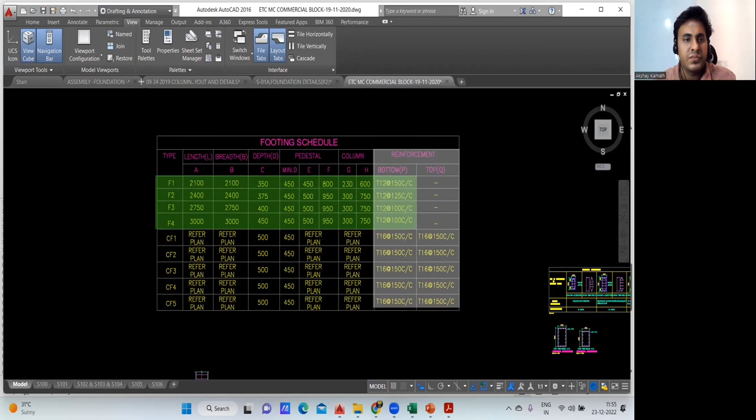So only the bottom is showing, that is 12 diameter at 150 center to center spacing. This is also 12 at 125 center to center spacing, 12 at 100 center to center spacing, 12 at 100 center to center spacing. He has written only bottom, but he has not mentioned whether it is shorter or longer. If they are not mentioned, it means both ways, you have to provide 12 at 150 along the shorter, along the longer, in case of F1, F2, F3 and F4. Got it? Because there is nothing mentioned in the top.

Now when you come to the combined footing, CF1, CF2, CF3, 4, 5 means it's a combined footing. C for the combined, F for footing. So here you will get bottom reinforcement and top reinforcement. So in the bottom, you're supposed to provide 16 dia at 150 center to center along the shorter, along the longer. And in the top is mentioned 16 dia at 150 center to center along the shorter and along the longer. Got it? In this way, CF1, CF2, CF3, CF4 and CF5 you're supposed to do.

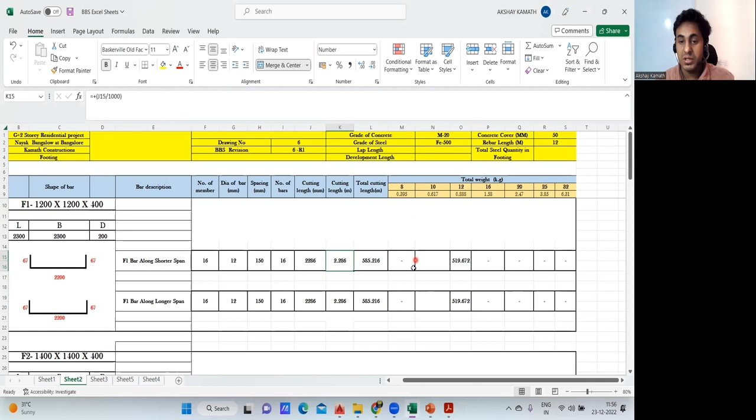So in this way, you can take a screenshot of this. If you're interested, you take out the quantities of this. Very simple. If there is bottom and top mesh, use this Excel sheet, the last one, this will solve your answer. If there is only bottom reinforcement, then use any one of the Excel from here. Your answer will be ready. And whenever you get the answer, make sure to change it. Suppose if it is 12 diameter, it should come in 12 column.

Later, I'll explain you one more way, not now. Maybe once I finish all the lectures, I'll take you to a few of the advanced topics of the Excel where you don't have to change this. Right now, you change it, but later I'll tell you one method where you need to apply the coding, IF formula, IF, WHILE and all. There you don't have to change. The moment you insert 16, automatically your answer will come in 16. The moment you enter 20, automatically your answer will come in the 20 dia column, in this particular row.

Right now, you will not do that. Right now, you practice this method. Later, once I finish all the BBS part, when I go with the Excel calculations, I'll add one lecture where you can make use of that formula, because you need to write IF and all here. We'll do that later, so that you don't have to change.

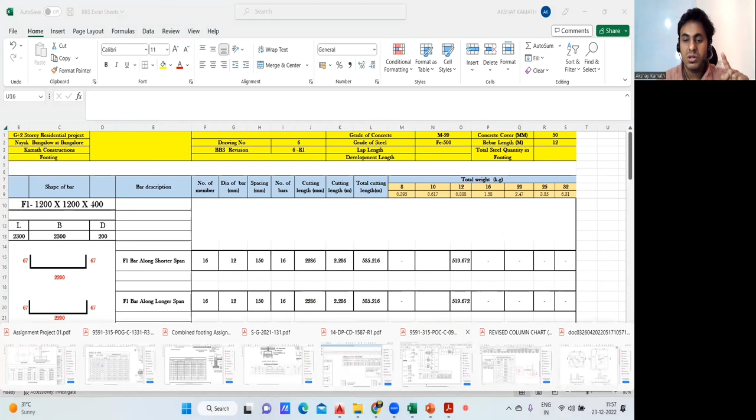So that comes under the advanced part. Right now, you finish these things. So I hope I was able to explain most of the things, and I've covered almost all the drawings here: industrial, residential, commercial, and all. So everywhere I taught you how it has to be done. The concept remains the same. Only the size of the footing will change, and only the diameter and the spacing is going to change. The rest, the method remains the same.

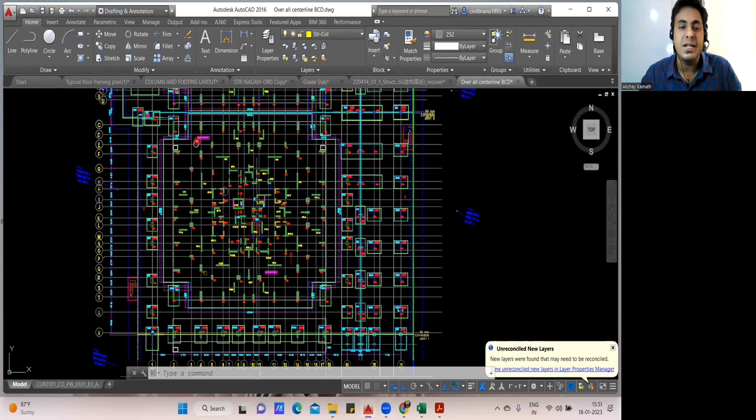So in this lecture, we will see how to find the BBS for the raft foundation. A raft foundation is again very simple. You just need to understand the concept. That's it. So I have a drawing here, and for this particular drawing, I'll show you how the BBS has to be done. I'll just select this particular drawing, Control C and Control V, and I'll paste only the raft portion here. So this is where the BBS will come.

Getting my point? So very simple. You just understand the concept. Raft foundation and combined footing both remain the same. The difference will come in the size of the footing. For the combined footing, we used to have a bottom mesh, and over that your distribution steel used to come. Similarly, you had a top mesh, and below that your distribution steel used to come. In the raft foundation also the same thing is going to happen. There won't be any difference.

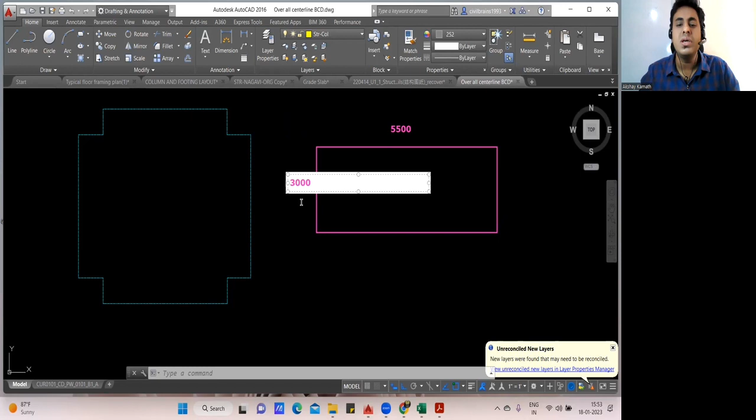Only the thing is, in combined footing there won't be lapping. For example, if I'm taking this as my combined footing, let us say the length is 5500 mm and the breadth is 3000 mm. So here we used to do the simple method. For the cutting length, this L we are supposed to find, the bar will go straight this way. Both sides you deduct the cover. And since 5.5 meter is less than 12 meter, one straight bar is enough. You don't have to do lapping.

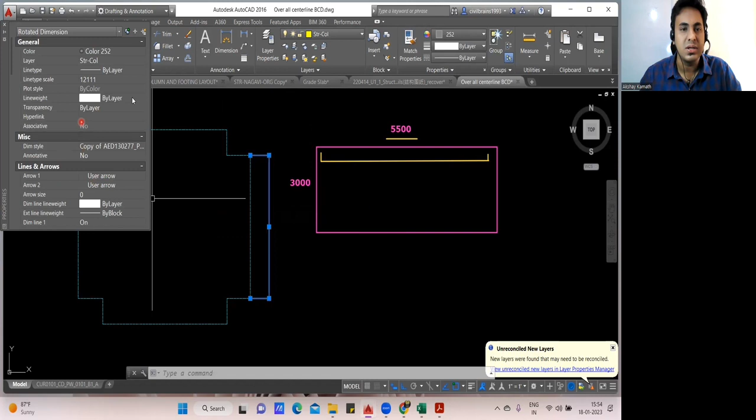But in the raft foundation, what will happen? The only problem is that the size of the foundation is not small. For example, let me measure this dimension from here to here. I'll increase the text size. Go to the properties, PR, enter. Text height, let me go for 150. It's not visible still. I'll go with 500. It's not happening, not an issue. You see this dimension.

So this length I measured, and it's coming 34,590 mm. If I divide it by 1000, it comes out to be 34 meter. Now try to understand. This length is 34 meter, but the bar available is a 12 meter bar. What will happen beyond 12 meter? Exactly, you're supposed to do the lapping. So only in the cutting length, your lap length will increase. Other than that, nothing is going to change. So in the raft foundation, your lap length will be added. That's it, very simple.

So how are we going to place the bar? It's very simple. Your first bar will be placed in this way, and the next bar will be placed in this way. Only up to this distance you place it. Finish. Only 3 bars you place here. Similarly, you place 3 bars in this way. Again, you place 3 bars in this way. I'm just showing 3 numbers. That may depend.

Depends on this particular length. You divide by the spacing, you get the number of bars. Cutting length is very simple. Okay, this will be my cutting length. After that, next time when you place the bar, this bar will be starting from here. It will go like this. Got an idea how the bars will be placed in the raft foundation?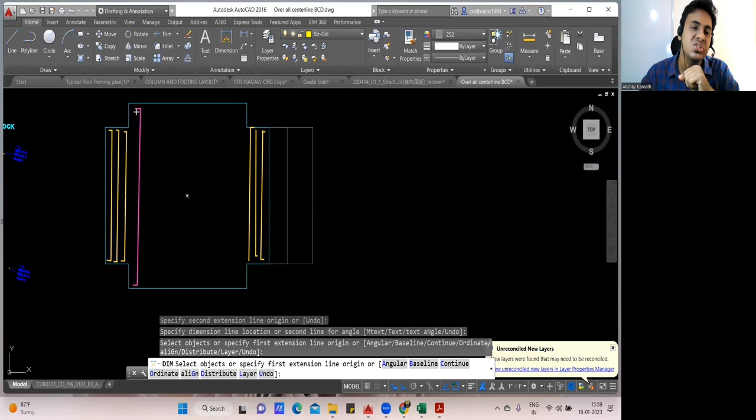So now you'll find the cutting length for this magenta color line, whereas previously we were supposed to find it for the yellow line. Then again, your bar will go in this way. Again, your bar will go in this way. Okay, I hope you're able to understand. Okay, fine. So once this is done, you start with the distribution steel again.

The distribution steel again, here it will be like this. It will come like this. Maybe you'll get some 10 or 12 bars. Similarly, you do here also. Fine. After that, next what will happen? You take it completely. Now you got an idea. In the center, it will go completely.

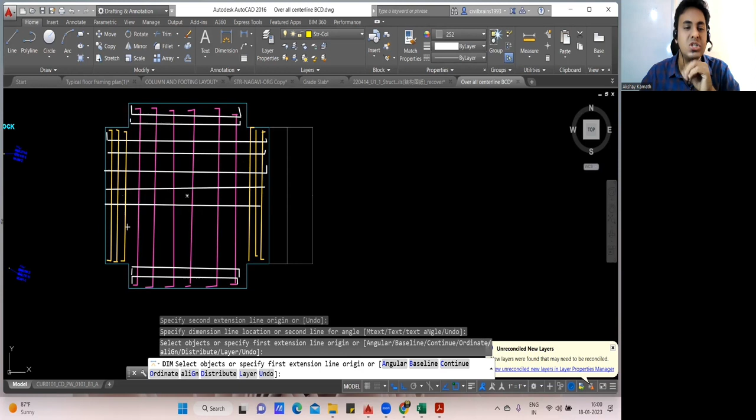So in the raft foundation, here the problem is my footing is not in a regular shape. It is having some offset. That is the reason I'm doing it in this way. But I'll teach you the concept, not an issue. Okay, you understood how it has to be done. This is the way you put the raft foundation. Only the bottom I did.

Similarly, you'll do the top also, like we used to do for the combined footing. Whatever was my bottom, the same will be my top. You just have to multiply by 2. You'll get the answer. Now, what I'm going to do is, see, this length we had 35 meters, isn't it? So leave it. I'll take another box and let me do that.

So let us say this is a footing what I have. This is my combined footing. I'll go in this way. And what is the dimension? For dimension, I'll go with a different one. Wait. Yeah. Fine. Let me draw one rectangle here and I'll do the raft footing here. And let me check the dimension. Okay. I think this should be simple.

Now you try to understand. So how much is it? It is 9,452. This will not work out. I'll have to take a bigger one. Let me go with a bigger raft. Imagine this is a raft footing what I have. This much big is my raft. And I'll measure this distance now. What I'm trying to do, I want it more than 12 meters. Yeah. Now it is okay.

See, this is 21,887 mm. So that means it comes out to be 21 meters. Now try to understand. This is 21 meters. If you want, I'll write here. This is 21 meters. Now, first, this is the first bar, the shorter span bar, we are going to place first.

Imagine that you are putting a bar in this direction first. Once it is done, it's very simple. Now, we'll start to find the cutting length. How are we going to put the bar here? Of course, you'll start the bar in this way. You'll take it straight and then you are going to place it here. But the problem is this is 21 meters. The bar that is available in the market is 12 meters.

So what do you have to do? Exactly, you have to do the lapping. So how many times will lapping come? That is important. We'll take 21 and divide it by 12. 21 divided by 12, you'll get 1.75. So forget about the decimal point. After this, the 75 you forget; only this number, one, I need to count.

Whenever you find the number of lappings, I always told you, forget the digits after the decimal point, only the one before that, which is one. So only one lapping will come. So we'll bring our bar in this way, and maybe it will stop somewhere here. Then I'll bring one more bar. I'll come here, this lapping will be done. I'll lap it in this way. I'll take my bar in this way and then the L will be given.

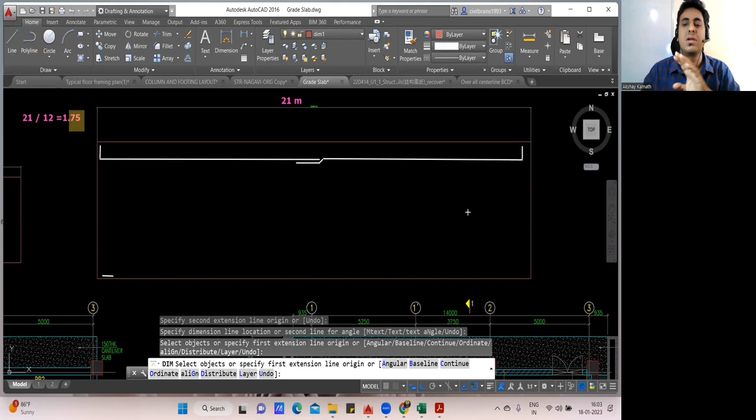That's it. So this is how the lapping, this is how the BBS for the raft foundation will be done. Now, can you find the cutting length of this? I'll find it for you. It's very simple. 21 meters, I'll write 21,000. Okay.

Minus, from the left side, since it's a raft foundation, I'll take 50 mm cover on both sides. Minus 50 from the left side, minus 50 from the right side. Okay, fine. So what is the answer you're going to get? 21,000 minus 50 minus 50. So this will be 20,900.

This complete length from here to here. This will be how much? 20,900. But since there is one lap, we have done one lap. No, you just add the lap length. This lap length you are supposed to add. So what you will do? 20,900 plus lap length. How much will you take?

Let us say in the drawing it is mentioned 50 times the diameter of the bar. So I'll take 50, and let us consider I'm using a 16 diameter bar. So multiply this by 16. Tell me what is the answer you are going to get? Plus 50 into 16. So 21,700 mm. But this is only the straight portion. What about the L portion?

To identify the L portion, you should know what is the depth of your foundation. For raft, let us consider the depth of my raft foundation is 1,500 mm. The raft won't be like 400 mm, 500 mm. It will be at least more than 750, 1,000, 1,500 mm. So can you find the L? It's very simple. 1,500 minus top 50 mm cover minus bottom 50 mm cover.

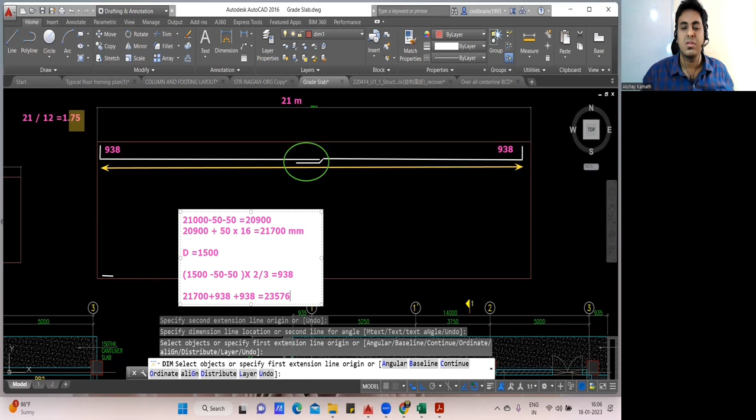Once you know the cutting length, you can find the number of bars. To find the number of bars, you should know the opposite length, from here to here. I'll consider this length to be, let us say, 7,500, because usually in the raft foundation this is what happens. 7,500 minus 50 on both sides for cover. So it will be 7,400.

Let us consider using a 16 diameter bar, placed at 150 center to center spacing. Or 150 will be too much; we'll keep at 200 center to center. So 7,400 divided by 200. You're getting my point? It's very simple. We're not doing anything which has not been taught to you. In BBS of the raft foundation, only the lap length is the additional thing you need to understand.

So 7,400 divided by 200 gives 37 bars. Since it's a number of bars, plus 1, it will be 38 bars. Finish. Your BBS is ready. You know the total cutting length, you know the number of bars, you know the weight of a 16 diameter bar.

Multiply all the three quantities. You'll get the weight of the steel. Simple. Very good. So this is how the BBS for the raft foundation has to be done. Okay. I hope that you are able to understand the concept. Okay. Fine. So now let us consider.

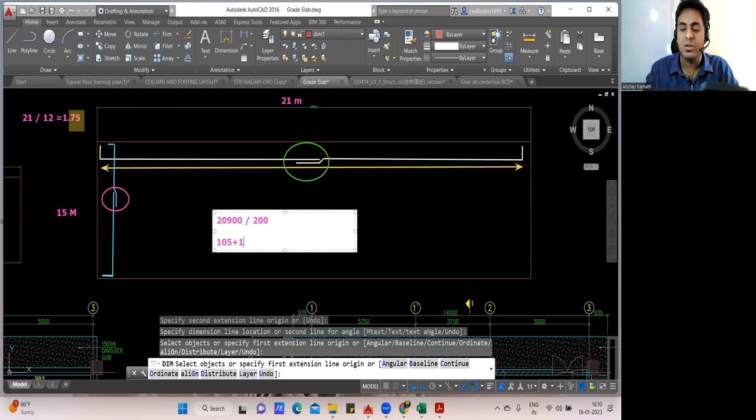Let us consider spacing is again 200 mm. You divide it by 200. So you'll get 104.5. So you'll take 105 plus 1. So 106 number of bars is required in this direction. And let us say it's a 16 diameter bar. Multiply by the unit weight of that, you'll find the BBS.

Got it? So this is the only difference which will come in the raft foundation. Rest all things are very simple. Only the lap portion you need to understand. But again, there's one more catch in this. What is the catch? I'll tell you.

So the catch is, let me remove this thing. These things are not required. I'll take out this portion also. And this portion also I'll take out, not required.

Now, whatever we understood is from the quantity estimation or BBS point of view. But practically on the site, you'll not do like this. You know that every time a lap is coming. So the next bar which you are going to provide, you'll not place it like this again. You'll bring the L-shaped bar here. Then again, you'll give a lap. And you won't take it like this.

Why? Whenever you do the execution, we need to understand not more than 50% of the bars have to be lapped at one section. What do you mean by that? If I have 10 bars and in all the 10 bars the lapping is coming. Here, how many bars did we get? I think 35 bars something we got.

So out of, let us say, 36 bars you're supposed to provide, what is half of 36? 18. So not more than 18 bars have to be lapped at the same position. If you lap all the bars in the same position, this particular point will be a weak point. Got it? So the code says that not more than 50% of the bars have to be lapped at one particular section.

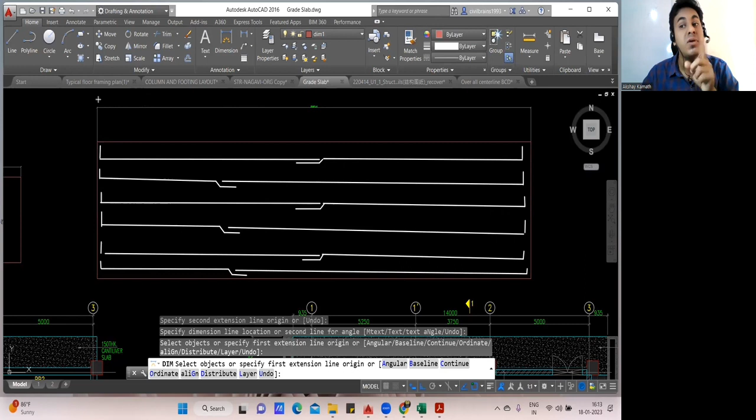Okay, now you tell me whether 100% of the lapping has been done. No. Why? How many bars are there? 1, 2, 3, 4, 5, 6 bars. Out of 6 bars, what is 50% of 6 bars? 3 bars, no? So only 3 bars I have lapped here. See, one lapping at this junction, second lapping at this junction, third lapping at this junction. So out of 6 bars, only 50% of the bars have been lapped here. Remaining 50% I have lapped at this junction and this junction.

You're getting my point? This should be equal. I mean, all 6 bars should not be lapped here in parallel. Alternatively, this will lap here, next bar lap here, after that here, in this way. So that is what you need to understand. But cutting length remains the same. This point is from an execution point of view. In the execution, when you find the cutting length, what you need to do? You need to change the bar. Whatever bar cutting you kept, you have to turn it and start from here.

Getting my point? This bar, I think I should take out everything. Yeah. So in the site, what you'll do, this bar first you'll put like this, one straight bar, and this lapping you'll do and put it here. Next bar, this straight bar, you'll start from here. In this direction you'll put it. So it will stop here, and this bar you'll bring in this way and you'll put it here. Getting my point? That you need to do on the site.

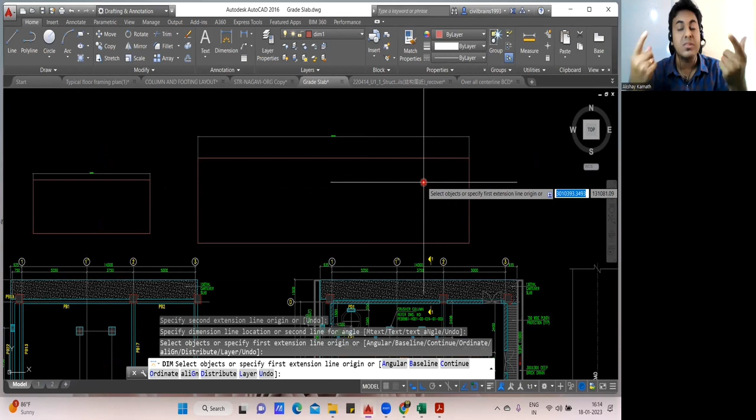Simple. Okay. So I hope you were able to understand the concept of the raft foundation. There are not many complications in the raft foundation BBS. Only the lapping portion you need to understand. While doing the execution, you need to understand the alternate lapping. If you do one lapping here, the second should come somewhere there, which the site engineer should take care of during execution. As a quantity estimator, you just have to find the cutting length, which is the same for all the bars.

Okay, simple, no? So I think I've explained this concept of the raft foundation. If you still have any doubt, you can always get back to me. Okay, that's it. Other than that, there is no doubt left in this. I've explained how the BBS for the raft has to be done. Concept remains the same. Only the additional lap length you have to add.

Now let me give you one more case. Let us consider I have one more footing. This is one more footing. And let us say this is 50 meters. So now what will happen? Again, the same bar will go. But how many laps will come? Because 50 meters is the span of your footing and one bar is 12 meters. So the number of laps, that is important. Number of laps will be 50 divided by 12.

Tell me how much will come. 50 divided by 12 is 4.16, which we consider to be 4. We just take the number before the decimal point. So 4 numbers, finish. So 4 times you'll do the lapping. So practically what you'll do, simple. You'll start your bar from here. This is your first bar coming.

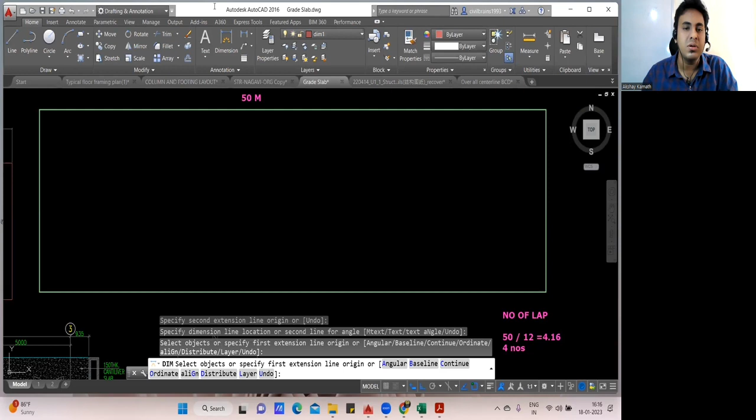First bar coming. It will stop somewhere here. Then you'll bring your next bar. Bring your next bar. You'll lap it here. It will take here, somewhere here. Then again your 12-meter bar will end here. We'll lap here. Bring here. So 2 lappings are done.

Next again your bar will end here. It'll come here. Fine. Next another lapping will come. This will be the last lapping. And then it will go straight. Understood? How much lapping was there? 4. So practically how much lapping are you given? 4 only you are given, no? So 1 lap, 2 lap, 3 lap, 4 lap.

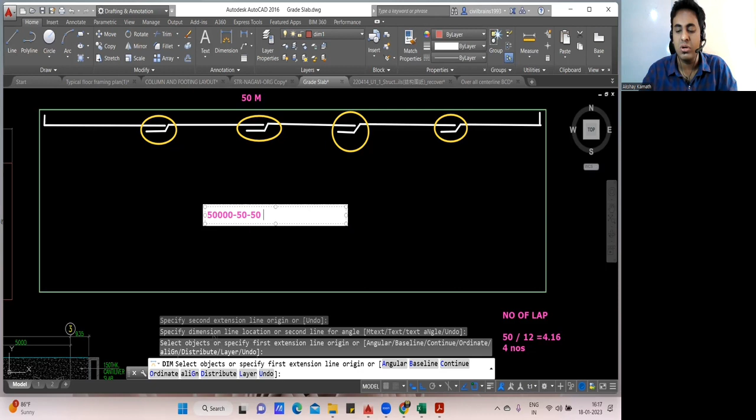Can you find the cutting length of this? Very simple. How will you find it? This is 50 meter. Okay. 50 meter is 50,000. Minus 50 from the left side, minus 50 from the right side. You do that. So how much will you get? It should be 49,900 something, no? Yeah. 50,000 minus 50 minus 50. So it is 49,900. Okay. Fine.

Now 4 times lap you're supposed to add. So 49,900 straight portion, plus how many laps? 4 times. So 4 into 50. Let us say each lap is 50 times the diameter of the bar. 50 into, let us say I'm using a 16 diameter bar. Plus this L I want. This L I know. I'm taking some random value. Let us consider the L I got is 750. I'm taking it randomly, just for our understanding.

Whatever is the depth of your footing, top cover minus cover, multiply that by 2/3, you'll get that L portion. So this is 750. This is also 750. That you add in the calculation. So plus 750 plus 750. What will be the answer? 49,900 plus 4 into 50 into 16 plus 750 plus 750. So this will be 54,600 mm, or let us say 54.6 meter is my cutting length.

So if somebody asks you to tell the cutting length of this, finish. Your cutting length is ready. 54.6 meter is my cutting length. After that, the rest you know how it has to be done. To find the number of bars, divide this length by spacing and you get the number of bars. Number of bars multiplied by cutting length into weight of 16 diameter bar will give you the total weight. Fine.

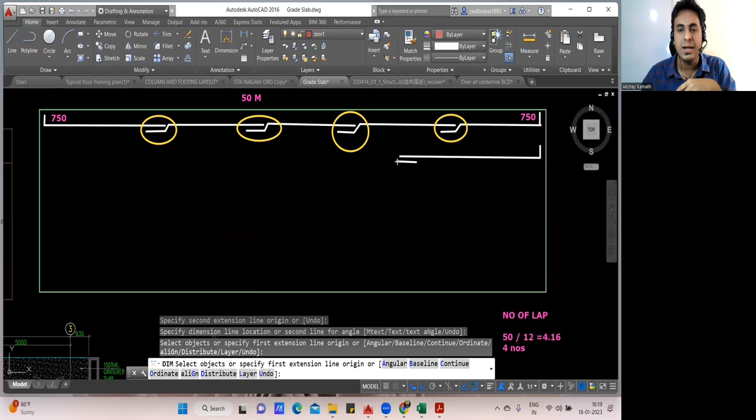Now tell me one thing. Next bar, how will you place it? Exactly. When you place the next bar, you have to be careful on the site. So we'll start from here. This may come somewhere here. Then I'll give one lapping here. I'll take the bar and stop here. My second lapping will be here. Then again I'll bring a bar and give a lap here. It will stop somewhere here. Then I'll bring one more bar, give a lap here and it will go straight like this. Okay, only 3 happened.

Okay, wait. This I have to be careful. This is okay. Next, I'll bring here. Next bar lapping I'll give here. Next it will be here. Yeah, now it is all right. So how many lappings happened? Again, 4 lappings I should get, but they have to be alternate. One is here, second is here, third is here, fourth is here. So alternately it has happened. Next when you come, the same will come here. Getting my point? That's it.

So I hope you were able to understand how the raft BBS has to be done. The method and the format remain the same. By this time you should know how the format will be done. You'll be writing the same thing as we did for the combined footing, with bottom reinforcement and top reinforcement. Everything remains the same, but it will take some time to make the calculation for the raft portion.